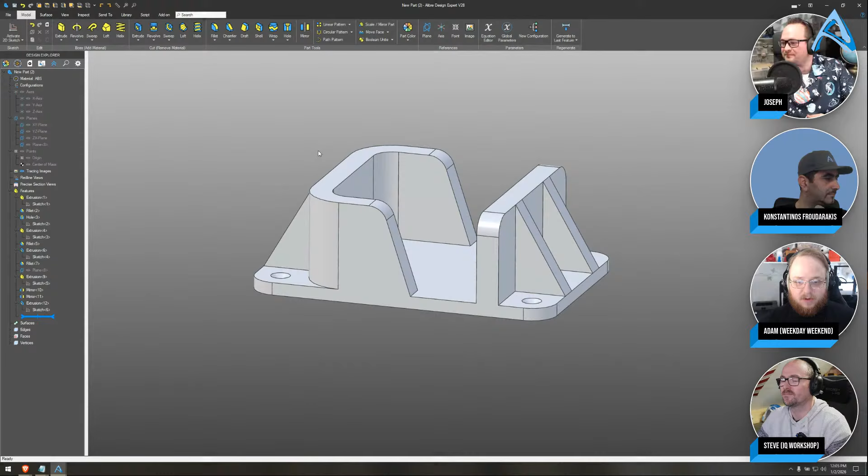I'm already in a part here. This is Adam's screen. Project to sketch is basically just a quick way to get things from another sketch or other geometry into your current sketch. So if I go into a sketch here and then just select a plane, it doesn't really matter.

If I wanted to use this exact curve right here, I could use my shortcut for that, or it's up here in the top left. You can click your edges or even a face that you're going to use in your current sketch, and then tell Alibre how you actually intend to use it. You could use it as a sketch figure and have it all constrained for you with this maintain association, or if you're just going to reference it with maybe some dimensions or something like that.

Sounds like we were echoing back a little bit. We had a little echo from you, Kostas. I muted you, sorry to do that, but...

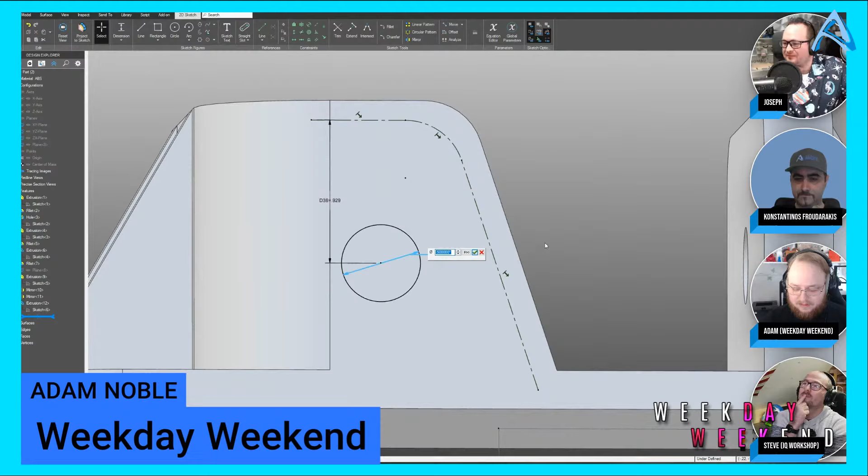Anyway, if you wanted to make a circle here and dimension it from the top, or whatever you might be using, or maybe make it concentric, that makes it a little bit easier sometimes, a little quicker to do that. Actually, it helps if I get rid of this dimension, that'll be what's causing my issue. But if you wanted to make it a little easier to dimension to existing parts of your geometry, that's what it does.

So just as a follow-up question on that, obviously Alibre is parametric and you can go backwards and forwards in your timeline. Is there a way you can ensure that your projected sketches follow any changes you do before that point in your timeline?

That is a good question. That one might be another one for... I haven't had a whole lot of trouble with that, but that might be a better question for Joseph or Kostas there. Yes, I haven't had a whole lot of trouble with that. Ask me one more time, Steve. Sorry, I was working on our sound here.

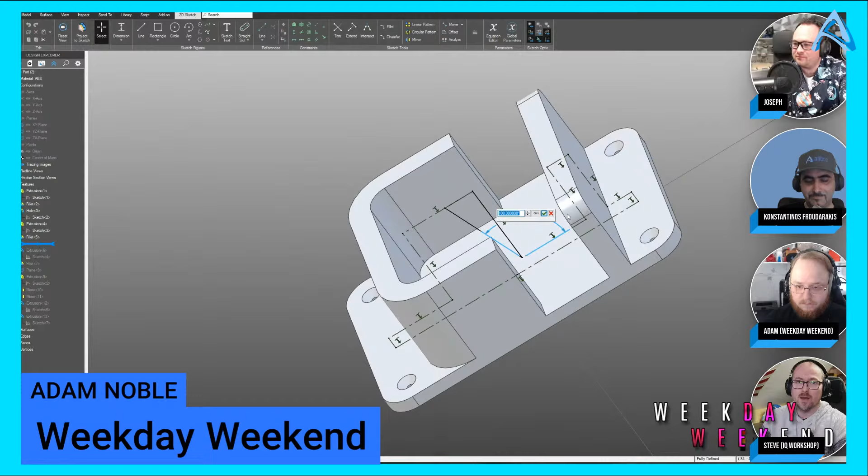So when we project into sketch, you can choose whether it's going to create sketch geometry or reference geometry. Because Alibre is parametric and you have a timeline, is there a way you can ensure that if you make a change before the projection, let's say you change some dimensions, that projected sketch follows the changes you make within your timeline? How can you make sure it's all constrained and you don't lose the logic of what you're trying to do?

Great question. That would come down to checking the box of maintain association, and then with association maintained, it follows the geometry. So you can see here, I'm changing this angle of this drafted surface, and it is following it because I did that maintain association. It is indeed keeping that concentric with this arc here.

Cool, that is a great example to come up with on the fly, Adam, that's very impressive. And a lot of that will automatically dimension. If I try to dimension that and I do a concentric with that arc, it'll usually automatically grab it. But there's certain things maybe you want to make coincident with a point or a line that is already in your geometry.

Maybe something that's on the other side that you can't necessarily see, or maybe it's not a symmetric part. This part's completely symmetric on one side to the other, but maybe it's not, and there's something on the other side you can't see. That's where it shines a little better, because if you can see it, usually you can just dimension to it without issue. But if it's hidden, that might help you a little bit better.

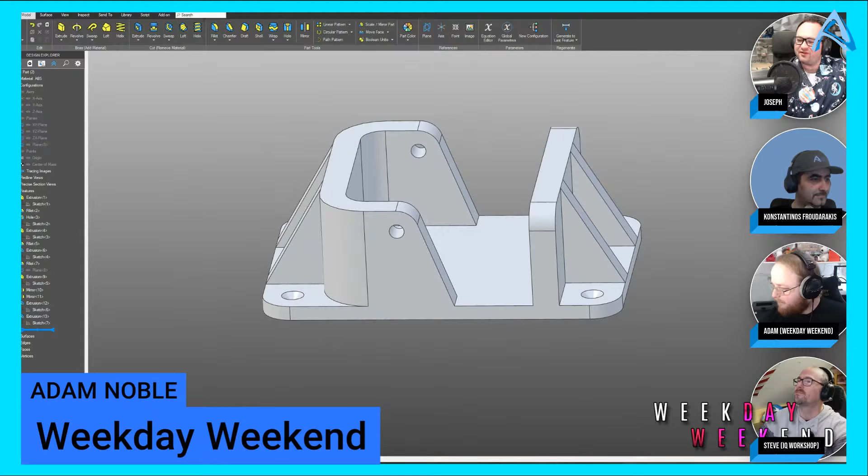I see another one. Can you explain the motion hierarchy of motion in assemblies? I can take that one, unless someone else has anything. No, take the wheel. All right, I'm going to go for it.

Let me get my screen showing here, and I've actually got a model that I can pull up. I'm going to pull that up. There we go. Okay, sharing my screen.

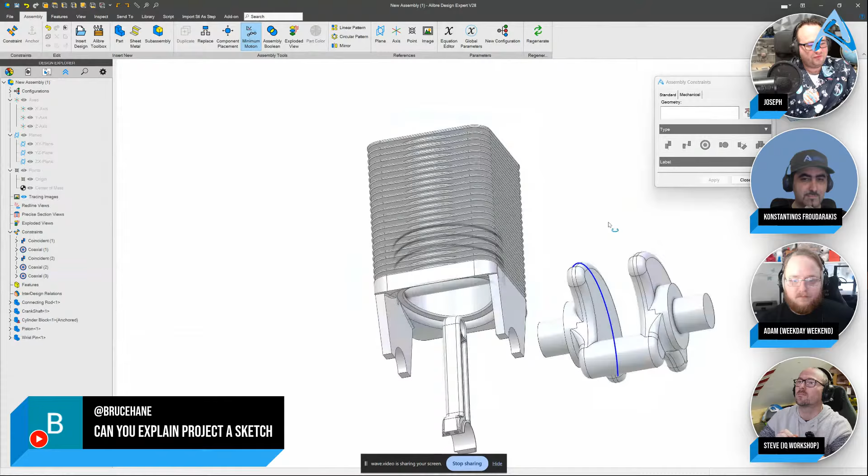And loading my new assembly. So I have here this unassembled small engine, and this is great because, how do we prioritize motion in assemblies? We use a system of constraints to where we say, I have the outer face of my piston, and I want it to go into this round face of my cylinder block, and we have a concentric relationship right there. Once I apply this constraint, I can move the piston in every way except breaking that concentric relationship between the piston and the cylinder block. I can do the same thing, making it concentric with this rod. So again, we allow for all kinds of rotations and twisting, everything except what breaks what we already have applied.

So if we put it into a hierarchy system, I would say whatever you apply first is what gets enforced as its top priority, and then everything else is allowed to move until you constrain it. That's how we get to something that moves just the way that we want. So hopefully that makes sense: what you apply first is what is completely enforced, and you keep adding new relationships until you're only able to move in the way that you want to. Let me know in the comments if that answers your question, and hopefully it does.

Can you provide some tips on using constraints and ways to stay away from the over-constrained error message?

Great question. Is that probably for sketches, I'm thinking? Yeah, usually that comes up during sketching. I can take that, but I don't want to hog the spotlight. Anybody else have a preference?

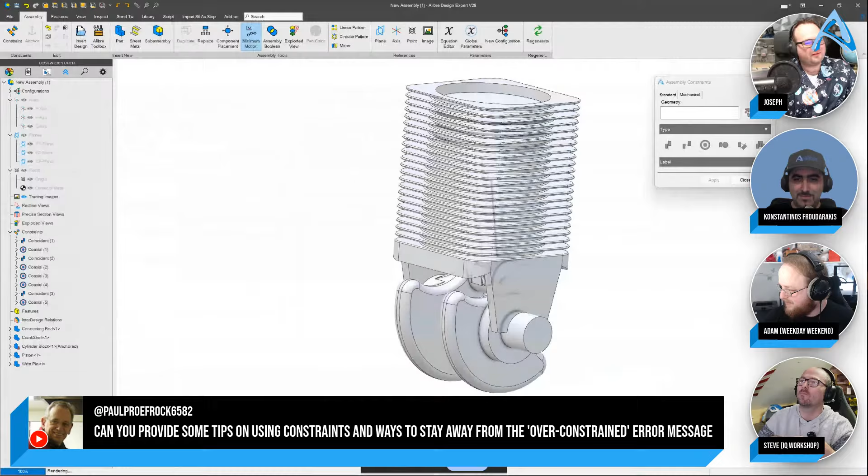All you, Joseph. I'll go ahead and jump into a sketch here. And again, if you're asking about assemblies, let me know. But here in an active sketch, I can start laying down some sketch figures, maybe with arcs, that would probably be the best example, because arcs can be pretty tricky to constrain. In fact, I'll make this arc. So let's say I have an arc and I want to start constraining this sketch.

My number one tip when you're asking about what's constrained and avoiding over-constraints is click and drag. When we click and drag, we can see how the sketch is allowed to move, and that gives us really strong hints on what we want to constrain. So I know that I can change the angle of this line, and I might say I want it to be vertical. If we constrain that one step at a time, we can see that now the line is going to stay vertical no matter how I manipulate it. I can move the end of this line, maybe I want that horizontal with the origin. We just add constraints one at a time, and nothing stops us from seeing how the sketch is allowed to move. I can say I want this arc to be tangent to this line, and then click and drag.

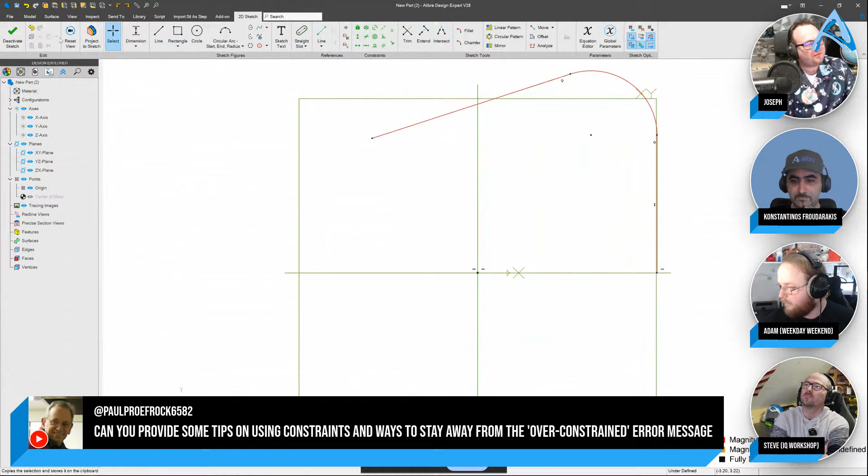That's what I might say, because if we start constraining something in a way that we can see it moving in, we know that we're not adding any redundant constraints. I might give this an angle of 25, and I can see that my arc can change radius. So adding these kinds of constraints to a sketch really is an art form.

With some practice, you can look at a sketch and have a really good instinct about it. If you're just starting out, there's nothing wrong with saying, let me just click and drag. Now I can see I have only 1 degree of freedom left, and it's the length of this line. Maybe I want it to be horizontal with the origin. So we know the kind of sketch we want to have, and we can just take small steps to achieve that. Hopefully that's an adequate explanation. I don't know if anybody here has anything to add.

He looks like he's saying that he's having it shown in assemblies as well. Ah, okay, perfect. Yeah, and right quick, sorry, didn't mean to interrupt there, Bruce.

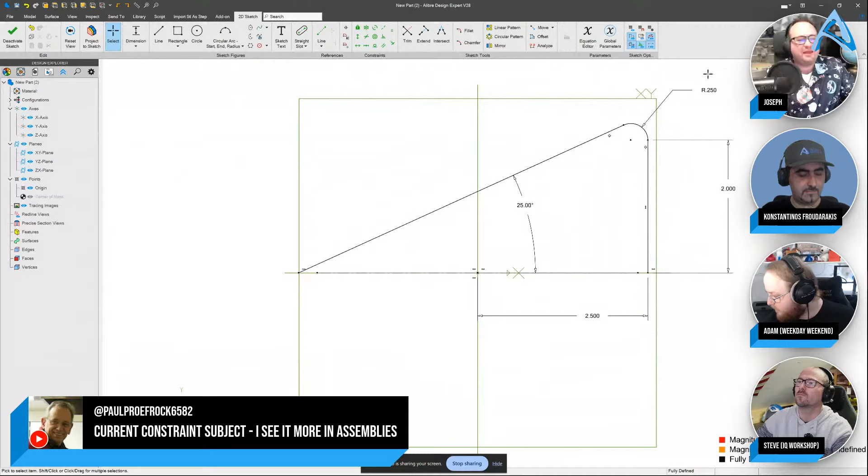There is a lock that you can do. You can lock sketch figures and things without necessarily dimensioning. Of course, you would usually want to dimension everything as much as you can to get it fully defined. Yeah, exactly. Thanks, Kostas. Sorry, didn't mean to interrupt you there.

Awesome, no, I'm so glad. Please interrupt me all the time because you guys always have great things to say.

The nice thing is what I just explained about sketches really applies to assemblies as well. If you think about sketches as taking all these degrees of freedom of how the sketch can move and we're constraining them, same thing with assemblies. We're just dealing with moving parts, and often feel free to utilize this click and drag technique.

Once I add a few constraints, I can see I can twist here, and I don't want to twist here. One great way to prevent twisting is I can select a flat face, or I could even say show reference geometry. These orange planes are the planes I used to model the part with from the part environment. I can select a plane and make a constraint. If I don't want that piston to twist, I can apply that, but that makes it so the rod can't swing.

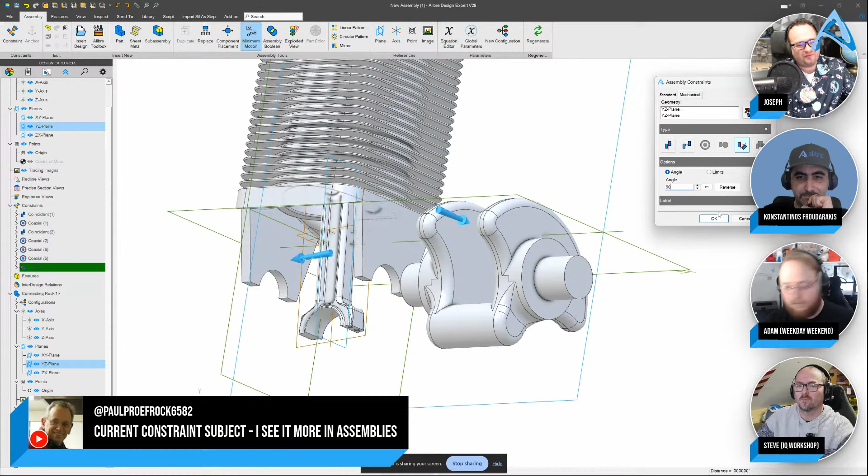So if we end up in a situation like that, we can look at our part in the Explorer. We can go to our constraints, and I can edit that coincident, and maybe make it an angle. Actually 90 degrees is what I wanted. Now, because we did an angle, our rod should be able to swing, and I'm not seeing it swing. So, of course that happens. Let's suppress that. Sometimes you need to uncheck minimum motion for things to work when you have multiple constraints.

But again, constraints are a highly mathematical thing, guys. There's a lot of work in the background from Alibre to try and understand what you're after.

For example, we're used to putting something in place using 3 coincident plane constraints. But in Alibre, things have 6 degrees of freedom, so X, Y, Z, and 3 rotations. Using 3 planes to constrain stuff gives you 9 degrees of freedom locked down. So Alibre needs to figure out which are the 3 redundant, and give you what you want. And that doesn't always work.

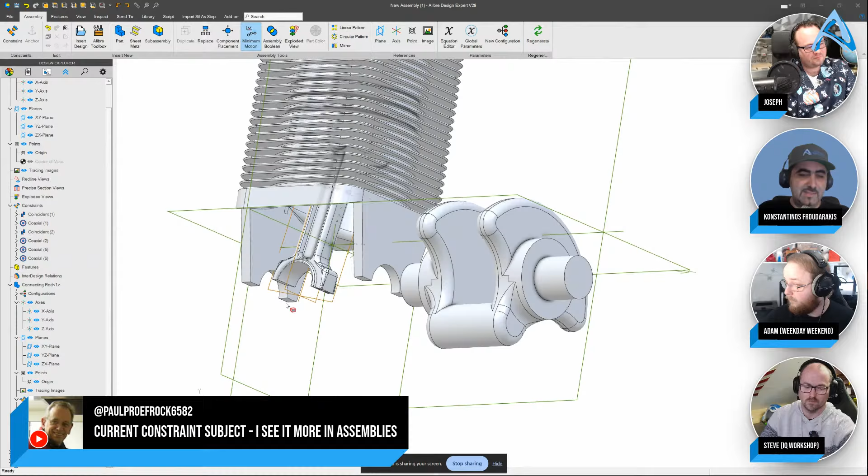It's an issue in other CAD software as well, and it's an issue in Alibre too. What I can say about it is, what I try to do is break things down into sub-assemblies. If you break things down into sub-assemblies, you can still get the motion by making that sub-assembly flexible. This gives the engine a clear indication of what you want, and it usually works better. But it is an art, as Joseph said. It's something you need to get used to.

A few other tips and tricks, like what you said. For example, if I may interrupt you there again - that very problem you had there, Joseph, in a similar video I did, I constrained the plane on the piston, not the rod, and that might make it work. But it's such minute changes. And Joseph on the official Alibre channel has a very good video on creating assemblies with such constraints.

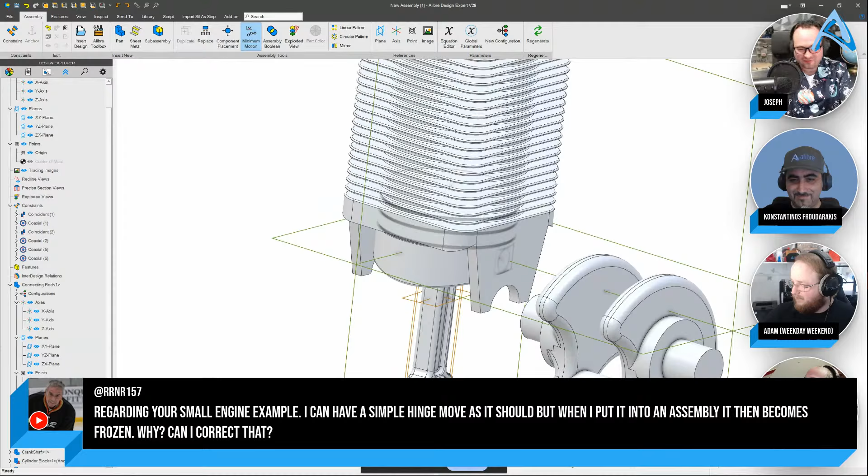So, thank you. If you do come across errors, everything that Kostas said is, of course, fantastically on point. Also, when we look at what could be causing the error, this is not an Alibre issue - every modeler has really intense algorithms that figure out these mates.

And one big issue, which applies to all modelers, is if I put a constraint and make that concentric, we've eliminated the ability of the piston to rotate around the top axis, and we've eliminated a few degrees of freedom. Now if I apply another mate, like putting this right up against that face, this mate also eliminates that same piston's ability to rotate around the top axis. Using mates that eliminate redundant degrees of freedom can be the cause of most errors you see in an assembly.

So focus on, instead of mating all these big faces, you can maybe put a point on there and make that one point level up with the plane. Any modeler using Alibre or any other modeler, that helps fix those issues. It's kind of a universal algorithmic problem.

There's probably not a perfect constraint solving engine out there. So hopefully all that helps. Again, it really starts with you clicking and dragging to see what your degrees of freedom are, and then eliminating those one by one. Let me know if that helps in the chat.

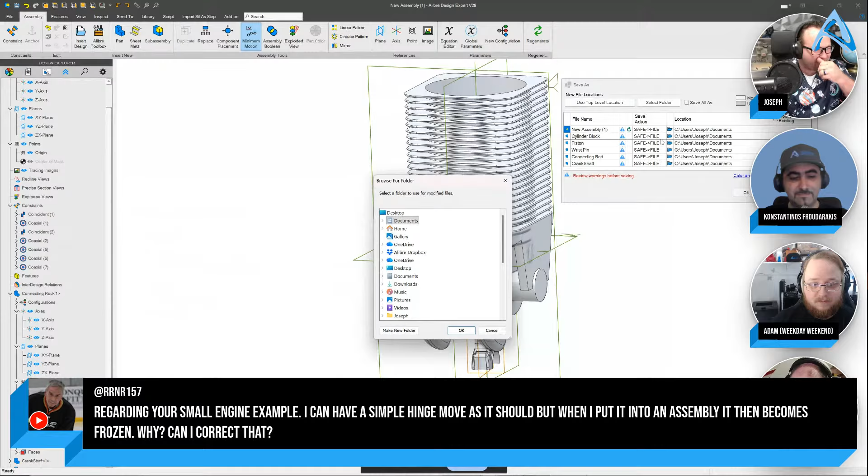We're going to make a little temporary assembly here, and let's start a new one. Oh, I just opened a part. Okay, so we're going to say new assembly, and let's import the assembly we've been working on. It will come in frozen.

Okay, perfect—again, can't move anything. You might ask yourself what's going on. So we're going to right click right here and say make flexible. By default, all your subassemblies come in frozen, so that things don't fly everywhere unpredictably when you move something. So we manually make that flexible, and it looks like that's still anchored. Now I can move all the parts in my subassembly. Hopefully that's a pretty simple fix you can see in real time.

Anyone else have anything to add? Nope, not at the moment. All right.

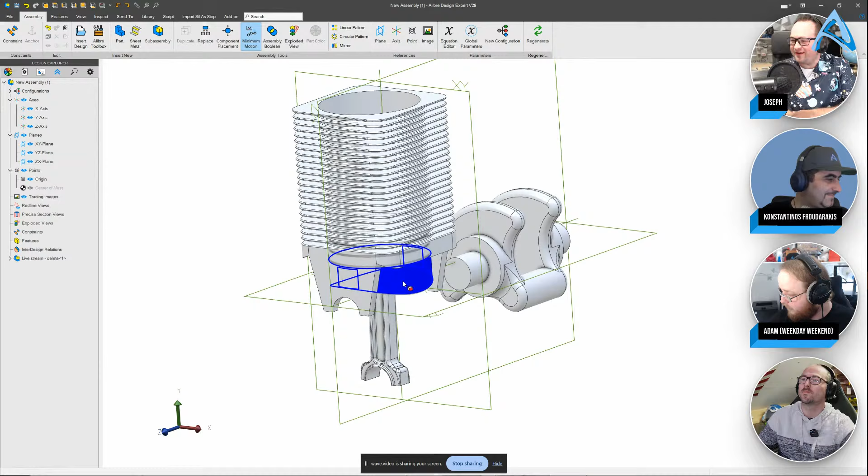I have an error that says entity is deleted when I try to extrude, but the sketch looks complete. I can modify it, but it won't extrude without the error. Yeah, well...

Sometimes I've come across this, and Dave, I don't know if that's exactly what you're trying to do. If you're coming from a different CAD software like SolidWorks or Fusion, you might be used to making sketches that have more than one closed area or section, and Alibre cannot extrude when you have more than one closed section. So that's one way to fix that.

The other potential problem you might have is something we discussed in the previous live chat, especially when importing sketches copied from something else, or importing a DWG or an SVG—sometimes you get duplicate lines. In these cases, you want to use the Analyze Sketch tool, which is a massive help. If you want, guys, I can do a quick demo.

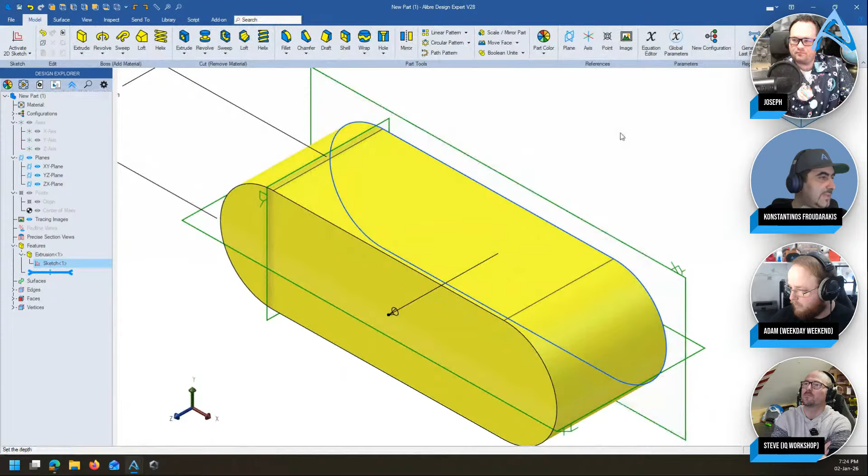So this is pretty much the example we did last time—just a simple slot. If I try and extrude this, it's going to let me extrude, and it's letting me drag and do all that. However, if I have an overlapping line here, it's the exact same thing visually, but if I go and extrude it, it's not going to let me. As you can see, I've got a red button there, and if I click OK, the extrusion comes in with an error.

Sometimes the errors are very helpful, and it says here that the sketch cannot be used because an endpoint is wrongly shared by multiple primitives. Endpoint wrongly shared by multiple primitives—you should look for overlapping lines.

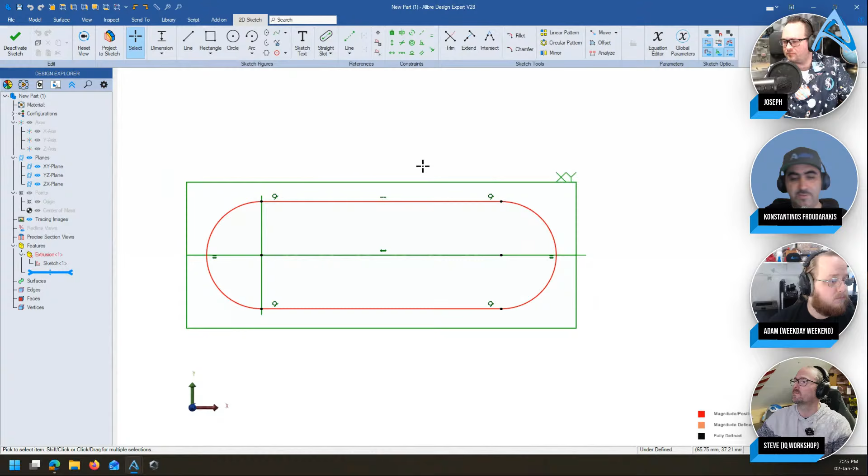And sure enough, if we go back in and use the Analyze tool over here, let me bring it over and click OK—you get open loop, it shows you where the open loop is, an intersection, that's all these, and an overlap. All of these errors are caused by the same thing, which if I go in and delete, yeah, we should be fine.

Right, and now I can extrude again, right? There you go. So yeah, just to show you what I mean by multiple sections - I don't mean this, Alibre is going to know to make a hole there. What we mean by multiple sections is something like this, right? These are multiple sections.

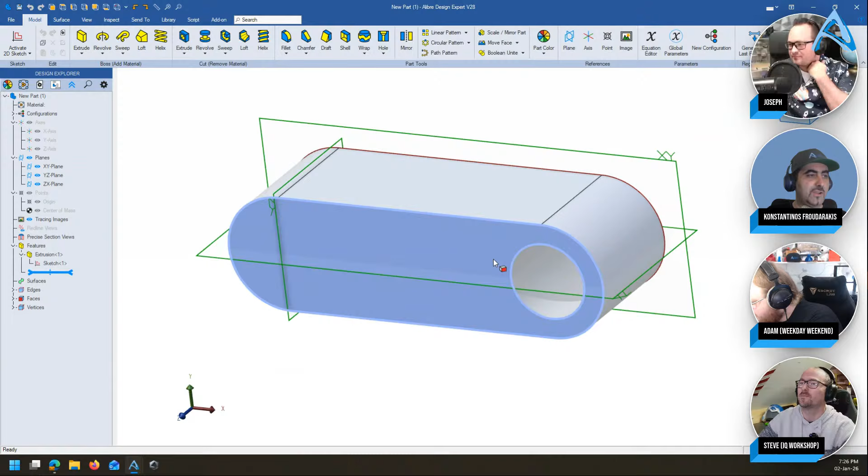So yeah, Alibre is not going to know what to do with that. If you're a SolidWorks user, you might call it multiple contours. It's a bit different - contours, sections, I think Fusion calls them that. But still, I hope that answers your question. If it doesn't, let us know again and we'll discuss it further, because this is a great issue, right? This is something that comes up very often, and it's definitely worth discussing.

Another quick addition to that - this is Max. If you're seeing an error that says something like 'attempting to access record marked as deleted,' it's just a general error. Oftentimes you're in a weird state - and by that explicitly I mean that some chain of events has occurred where your part may be in a state such that you might want to back up to your previous save, depending on the nature of what that error message sounds like.

Sometimes it'll keep going and you'll be fine. Sometimes the weird state can compound on itself. So especially if you can find ways to reproduce that consistently, that would be an example of something that you should send to us so that we can look at further. So it really just depends on the wording of that error - sometimes it's something you can fix, sometimes it's not, and maybe you should just delete the sketch and start over.

Thank you so much, Max. That's really helpful. Yep, we have a help desk that's really helpful, and they're good at tracking that kind of issue. So hopefully that answers your question.

I have a question about the offset command. When I am editing a sketch, how do I get back to the offset dialog again if I want to go back and change the offset dimension value? That's a good one. That's a really good one.

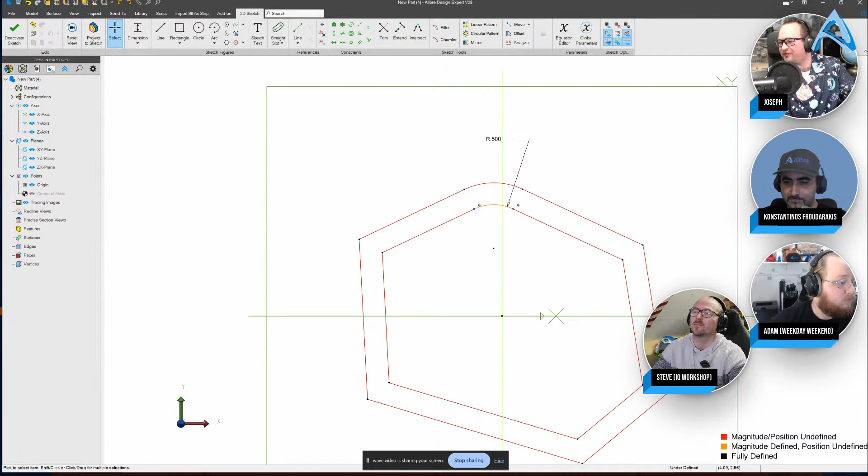I saw a very interesting question. Oh, here's another one. Well, one did come up, but I saw a very interesting question about Kostas being gracious in helping someone. If I can find that one. Yeah, wow, yeah, our producer is on point. That was amazing. Yeah, Rufus, yeah.

Look, guys, I just want to say, first of all, Rufus is too kind, right? That's one. And another thing I want to say is people come talk to us in the forums, right? One of the best forums ever. You will definitely find somebody to help you. There are a lot of people that are active, right, and share answers.

Yep, can you still hear me, Joseph? I can still hear Kostas as well. Yeah, thanks, I can. Yeah.

So I'm saying, people, first of all, thank you so much to Rufus for being so kind, and people, join the forums. Join the forums. First of all, your question might be the question of somebody else, and by asking the question you might help somebody, which is true for this stream as well. And secondly, you will see that there are many people active in the forums and eager to help, right? It's part of the value of Alibre, if I may say so. The forums are so good.

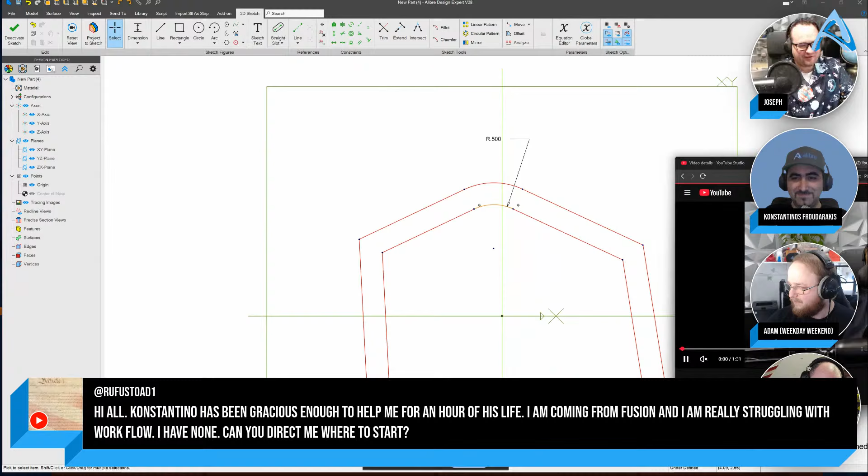All of these videos are about 4 minutes long, covering how to navigate the home screen, what the part environment looks like, all the way down to sheet metal modeling, making 2D drawings, and just about everything else. So this is a great zero to hero guide. If you have trouble navigating, or don't know where to start, the first videos here are very comprehensive as to how to understand everything you're looking at.

And then I think everybody on here has their own different contributions to the CAD community. I don't know if the rest of you want to cover it as well.

Yeah, so for me, it's about making sure you're not trying to use the tools in a way that doesn't work with the way you think, right? That's the first thing. So for example, let me clarify that. Alibre is a solution, right? It's how you apply that to a problem. You don't buy a tool and then go find a problem to fix with it.

So I would say you need to have a very specific project that you want to achieve, and start with that. Try and make it as simple as possible, even if it's very primitive to you, like creating a cube - just creating a sketch, extruding it, and understanding how the inputs you're making to the application actually turn out into the model you're trying to make.

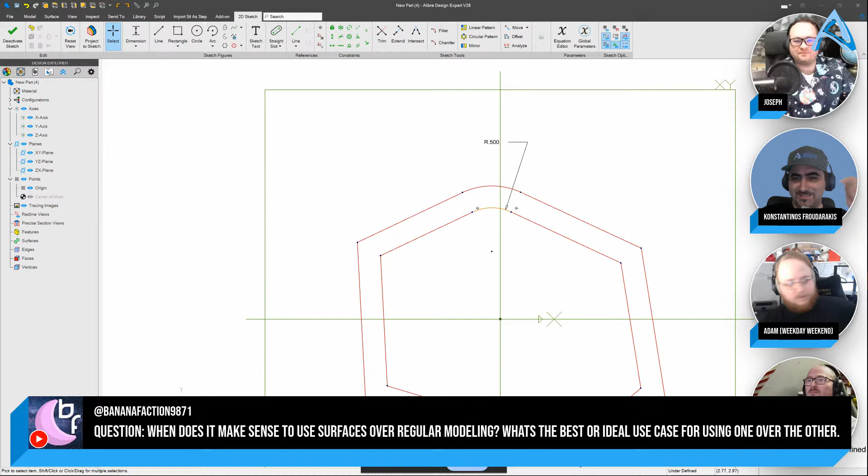Well, actually, can I just say we had a great example in the first live stream where we turned the model into a surface, did a thin extrude, projected that thin extrude to get parametric sketch offsets. So that's a good use of it. But I'm sure Joseph has like 1,000 different uses for it. Yeah, Kostas knows exactly what a fan of surfacing I am.

So I would say if you can model and get the job done using solid geometry, do that. It is going to be a lot more simple, a lot more straightforward. And if someone else wants to go through the model, it'll be simpler for them. And it's probably less computation depending on what you're doing. So prioritize solid geometry. But if you have something where solid modeling is not getting it done, surfacing is a great solution. And here's an example of that.

I have a feature and I want to project downward, and let's say that I want to CNC this part, right? So I select this sketch and I project to take some material away. Let's say that I want to go 1/2 inch down.

Well, if we're going to CNC that, those walls have a lot of overhangs, and that's just not going to work well. I went too far down and broke through the bottom there, but that's not good intent. We want our walls to be vertical, right? So what's the solid modeling solution? It would be an extrude cut, but if we need this face to follow the same curvature as this face, it gets hairy with extruding, right?

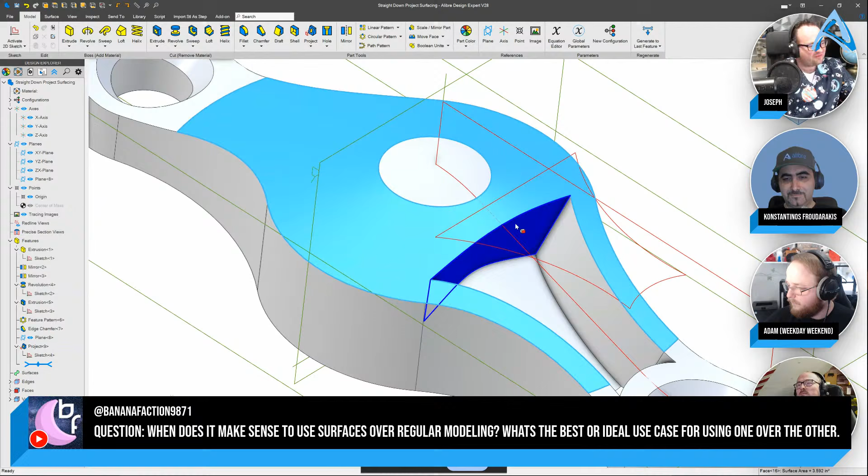There's a few ways we could approach this with surfacing, and surfacing just augments our ability to do things like that. Maybe if I go with the surfacing solution, I'll extrude this to 1 inch, and then make this floating body a surface. I'll grab a surface here and delete this top face. So for my surface workbench, I delete the top face, and now I have these infinitely thin references of the outside of this thing.

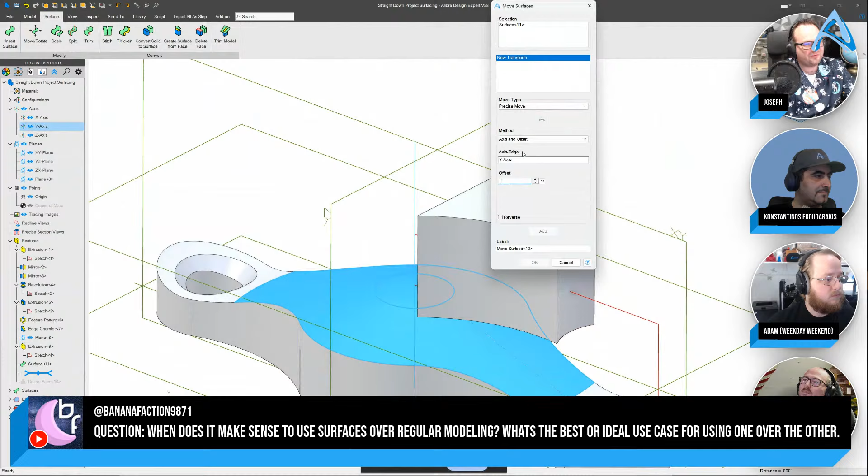But before I do that, let me select these faces here and then create a surface from a face. There we go. And I can move my surfaces upward. You can see that surfacing does break down into a lot of steps, and this is one reason why we may want to default towards solid modeling whenever possible. Let's move that in maybe less than 1 inch, maybe 0.5 upwards. No, 0.75. So we get what we want. There we go.

And then I'm going to modify my sketch. As you can tell, I maybe didn't have this set up for demoing yet. So make that, not that. No. Okay, that should do it.

So we've got the surface, right? And then we can cut out the bottom of this so that the curvature of this face matches. So we're going to say surface, trim model. We select our surface, and then we just trim out the bottom of that, right? Now you can either hide or delete face. There's schools of thought that are great for both. I tend to delete face to get rid of my surfaces when I'm done with using them, but now we can take that back to a surface.

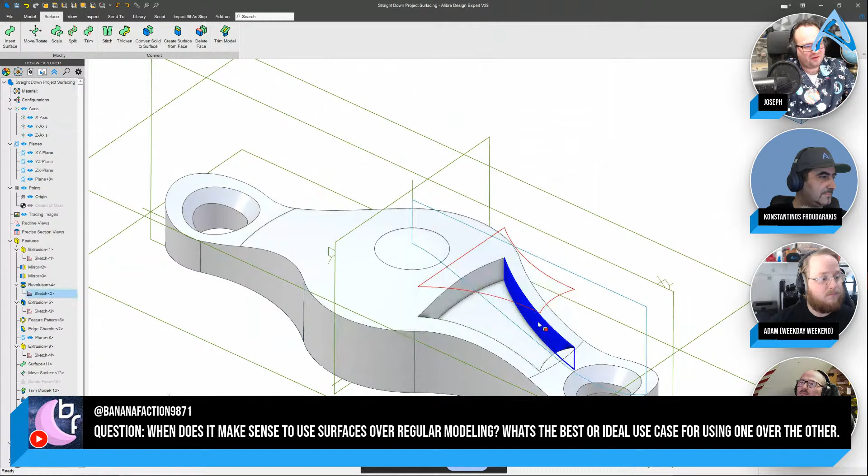Move that downward. We can tell this is just a lot of workflow for surfacing that might be able to be done in one operation with solid modeling. So we'll move that down 1 inch. Once again, trim model. I promise I'm almost done. And then if I go to hide my surface down here, what do you know? We have those vertical walls that are a lot more manufacturing friendly, right?

So surfacing, we can overcome those difficult specific problems by generating surfaces that do what we need. So that's probably the case to use surfaces over regular modeling, but default to regular modeling whenever possible. Let me know if that answers your question, and thank you for asking. Greetings from the Space Coast.

As 3D scanning becomes more and more widespread and affordable, it's helpful to do a webinar or videos that show how to use surfacing. That might be an interesting one, a surfacing webinar. I have brought that up, and maybe that's the push over the edge that I need to start pursuing it. So let's talk about that internally and see what we can do. I think there's a lot of great value in webinars that cover lesser used features.

I'll second that, a webinar on surfacing, because every time Joseph puts up something about surfacing, I learn something. Not just surfacing, direct modeling as well, right? Alibre has some really clever direct modeling features like delete face, offset face, and stuff like that. And when we're talking about importing faces and models, surfacing and these direct modeling commands are a game changer, and they can get you some amazing results. So yeah, definitely worth pursuing, I think.

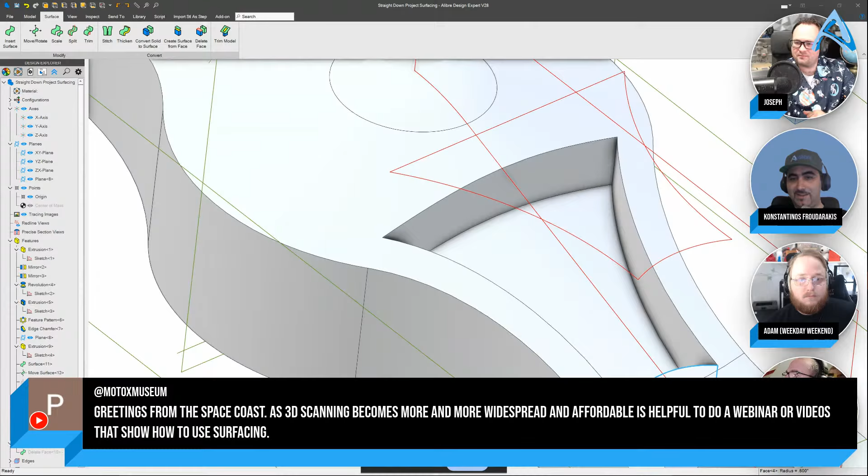Thank you very much. Which setting in the hole tool would you use for the minimum size 3D printed thread? I'm guessing a minimum size is an 8mm diameter bolt. I don't want to hog the limelight.

I do have an answer for that because I was kind of involved with the threading, the thread and hole tool when it updated in V28. I'll take this one. Let me know if anyone has anything to add. I'm not quite sure how on the hole tool. Which setting in the hole tool would you use? Are you just talking about the...

I think I'm running a lot of RAM right now, so I might be running a bit slower. But I'll choose the question that's talking about modeled threads, right? Yes, which Joseph indeed actually worked on most of them.

Then there's another very interesting question by David on how to use a reference line in a sketch as the axis of revolution. As soon as you're done, I might take that on. Oh, awesome, I'd love that.

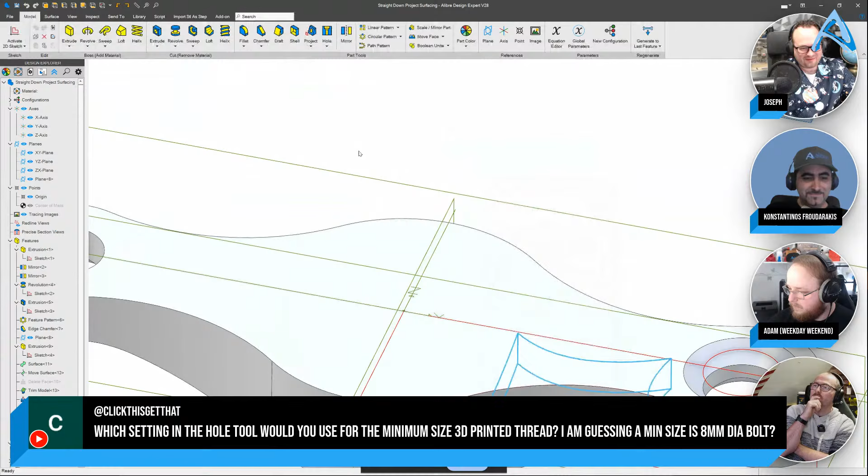I'm just going to open up a new part here, make sure that things are behaving for me. Don't forget to close, that's probably the biggest thing if you're eating RAM. Steve always gives excellent advice.

We're going to extrude that, and now let's jump into the hole tool here. Make sure things are working good. We're going to say unified coarse, and then we'll up the size of that to 0.5, and then we want that to be modeled.

When we go to modeled, there are several options, and I think this is what the question is around. This is the nominal thread, right? When we talk about screw threads, the nominal thread is when the male thread and the female thread have the exact same profile, no gap between them. So it's not a realistic thread.

If you want a production quality thread, and not all platforms do this, so I'm going to pop my collar as Alibre and say that we've got the cool features. We can change this to a production thread by going to, say, average. This is the center of the line tolerance for regular threads.

Now, when we go to minimum material, this is going to be for the loosest fit, because the smallest amount of allowable material for the 1/2 by 13 coarse thread gives the loosest possible fit. Now if you want a really tight fit, this would be the maximum material for the production thread. So if you're not on nominal, there's going to be a gap between your internal and external threads - this is for the tightest fit, and this is for the loosest fit.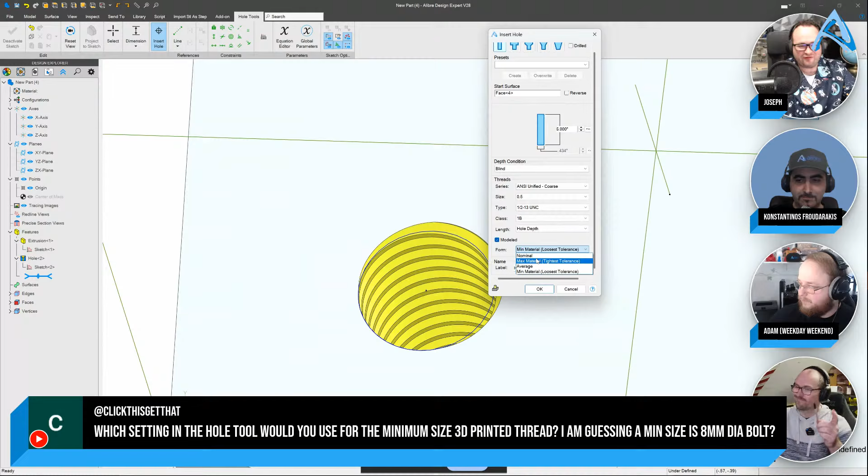Now, if you're 3D printing, 3D printers tend to overbuild a little bit, so you always end up with a little bit of extra material. I'd recommend always 3D printing on the loosest. But if you want to use a tap or a die and fine tune it yourself, maybe you want to go with max material so you have the most material to be able to remove in a very fine fashion. Those are my thoughts on it.

Anybody else have any thoughts on it? It's worth noting that you might want to also double check that your 3D printer is well calibrated and all that kind of good thing. Is my microphone not coming through? No, I can hear you. Making sure. You got to make sure your 3D printer is hearing you pretty well, pretty calibrated and all that kind of stuff.

There we go, cool. Yeah, we might have a sound issue here. Okay, we working now? I can hear everybody. Okay, yeah, I can hear everybody too. It's probably just me. You know what, I think I'm just going to refresh my studio and go ahead, Adam. I think everybody can hear you. Leave us a comment if you can't hear Adam.

Basically, just double check your 3D printer is well calibrated and all that kind of stuff. Threads are quite difficult sometimes. Now, using the minimum material, I was able to get threads my first try, but I've spent a lot of time calibrating my printers. I don't know that my Ender 3 V2 Neo could do it. My P1P certainly can, but my other one might be a little iffy despite all its calibration.

So definitely test out your own printer and learn what it can do, because every printer is going to be different. For me personally, using minimum material worked first try, but if it doesn't, you might want to do some flow rate calibration, which is usually built into things like Orca Slicer. In addition to that, you can look at tolerance tests to print on Printables - there's bound to be some on there that help you figure out what your 3D printer is capable of producing.

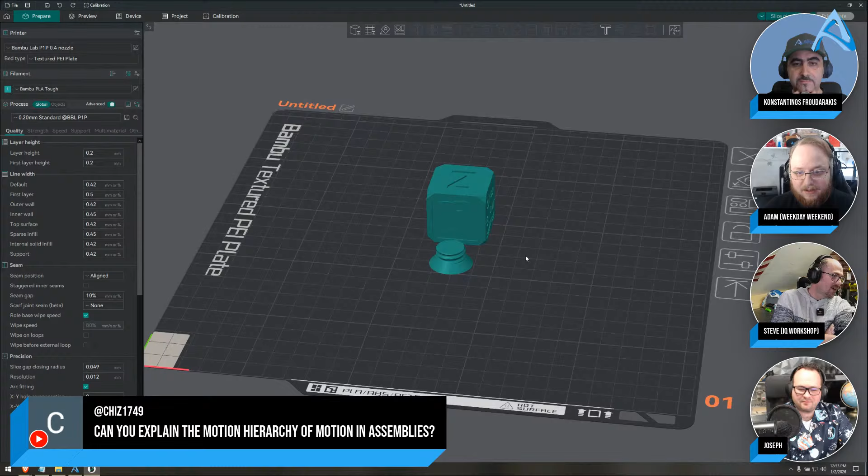So if you're in Orca Slicer, for example, if you just right click on your build plate, you can add handy models, and the Orca tolerance test is a pretty good one that'll tell you how your holes are looking. The Voron cube is also pretty useful. There's a whole bunch of these handy models you can use — the Orca cube has threads in it too.

If you're not using Orca Slicer for 3D printing, you really should be. It's free and open source. Personal opinion, I switched to Orca from Prusa Slicer, and to be fair, it keeps surprising me with the feature sets it's got. I second that recommendation for Orca.

This might be a good one here for you, Joseph. Actually, before we go there, can I just take over the screen, because David had a great question.

Which is how you can use a line in a sketch as an axis of revolution, right? So let's just say that I do something like this. Okay, this is a bit rubbish as modeling, but still. So let's say that I want to revolve this.

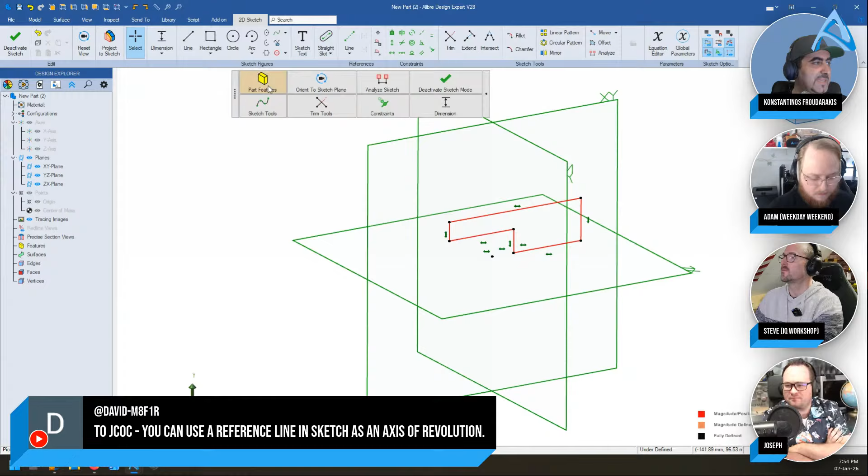First, let me show you something. If you click in a blank space, you can get this very handy toolbar, or you can just hit the space bar and it comes up as well. So you hover over part features and go into revolve boss, and you get your sketch pre-selected here. That fly-off toolbar is really useful.

Now, how to use a line of your sketches as an axis? First, you need to go into your view menu and make sure you have toggled your sketches on, right? The hotkey for that is Control-Shift-K. So you see I'm just toggling it on and off. But when you have it on, you can use your sketch lines as an axis.

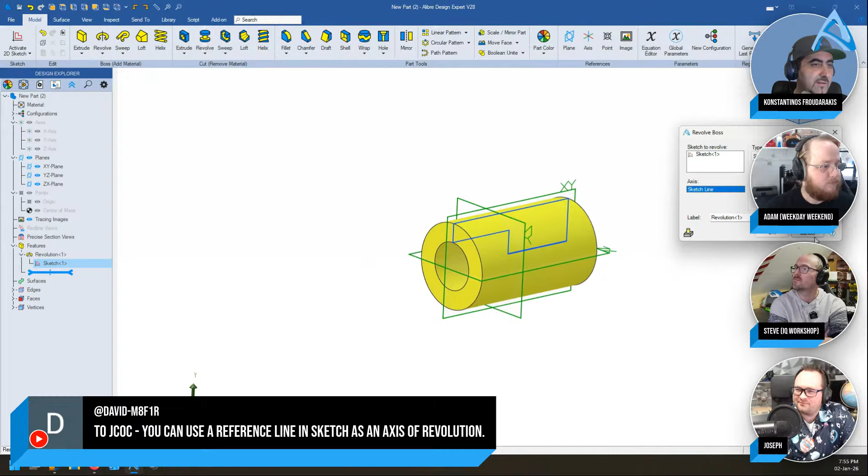For example, as soon as I hover over this line, you saw that it got a different color — let me show that again. As soon as I hover over it, it gets a different color. So I click on it, and now that line is used as the revolve axis, or I could even use this one. So first, make sure you have toggled your sketches on.

And I want to show you yet another way to do it. Whilst you're in Sketch, there is a button in the references area of the toolbar — it says Insert Axis from Sketch. Now, let's say that the axis I want to revolve around is a reference line.

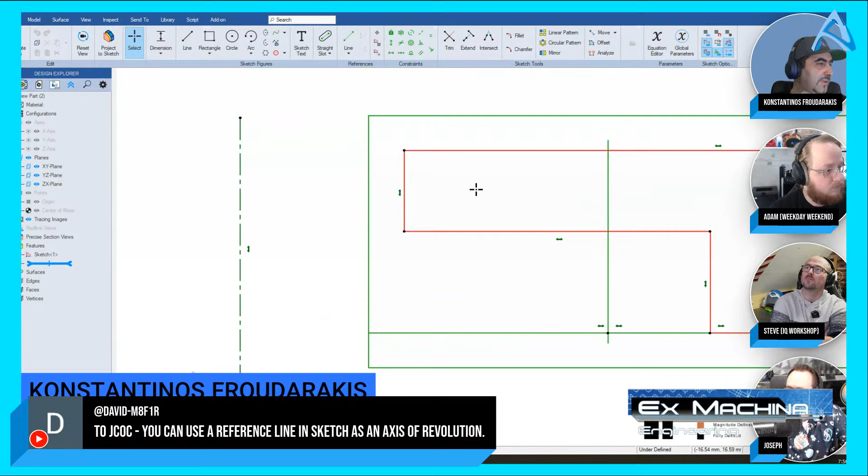Now you see that when I close the sketch, the reference line is no longer visible, but I want to revolve around that reference line. So I hit here where it says Insert Axis from Sketch.

This is the window that comes up. I select this line, hit Apply, close, and now as soon as I come out of my sketch, I have an axis here, which I can use to revolve around.

So I select my sketch, I select my axis, and now this is another way to revolve around basically a line from inside your sketch. Let's say you have a rectangle and you want a hole in each of the corners. One way is to look through my channel and find the pattern fill equation, use that to get one in each corner, or fill the entire thing with holes. But here's another way to do it.

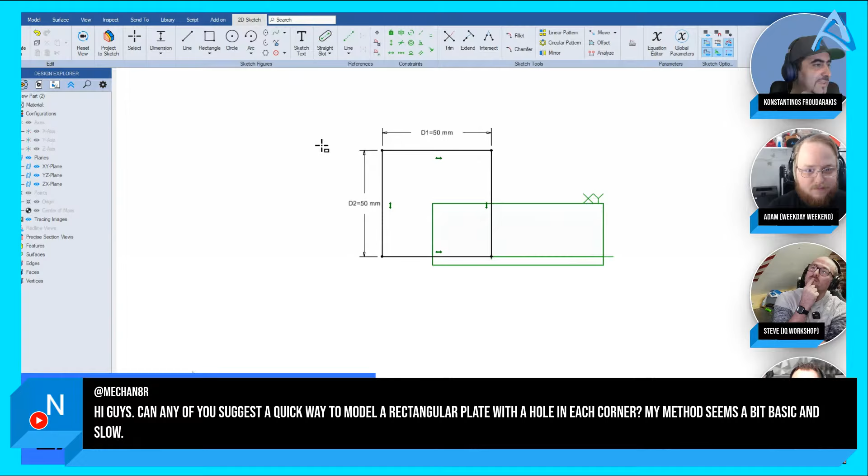Let's say this is 50 by 50, and I'll extrude this for 5 mil. I'll put a hole here, slightly centered, and this hole is also 5. I'll cut through all. So this is a speed modeling quick tip.

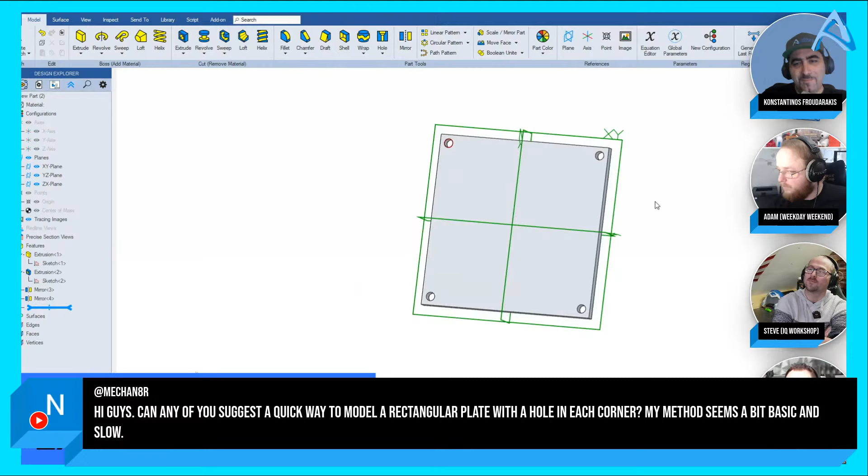Just use mirror. If you use this as the mirror plane and mirror the entire part, now you've got 2 holes. Do that again and mirror the entire part, now you've got 4 holes, one on each corner. So that's a quick way to do it. If your part's conducive to using this, just model a quarter of it and mirror it around.

So yeah, those are two questions that I saw that I wanted answered. If you have anything else, guys, go ahead. Hey, thanks, Costas. Very good stuff. Do you have anything else? Oh, Alex is already on the move here.

I've had instances where, as I add other motions after the initial constraint, the first motion is frozen. Yes, I think I've seen what you're talking about, it's really hard to replicate. I'm guessing it goes back to the assembly constraints we talked about earlier, where multiple redundant constraints may be being taken up. Focus on having every constraint eliminate one or two degrees of freedom at a time, and don't apply constraints that would take multiple redundant degrees of freedom. It's a universal thing, I think all CAD modelers have this problem, it's just algorithms and math.

Can I also add that if a constraint throws an error, Alibre stops showing you and simulating the motion of the assembly. So if for some reason you added a constraint and now the thing doesn't move, go through your constraint list. It's more likely than not that one of the constraints has an X on it and has thrown an error. So check that error message, right click, select status, read that error message, see what's going on, and try to fix it. Just a heads up, if another constraint throws an error, when you add a new one, Alibre will stop showing you the motion of the assembly.

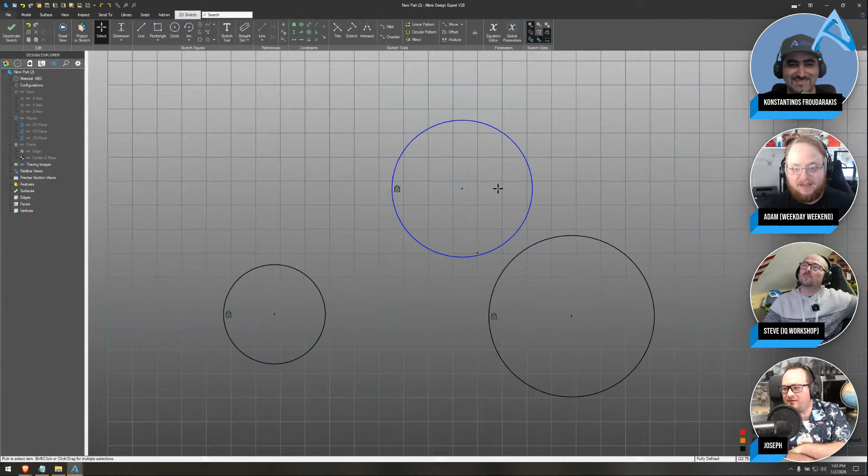You could have a bunch of stuff, and you can just Control A and you should be able to fix your stuff with the fixed constraint like that. If I do it all at once, it tries to fix them all at one time. But just use your fixed constraint, and then it tells Alibre, what you see is what you get, just put it right there and don't worry about it. But if you can, always dimension it.

I'm glad you guys are here because I think I was reading that question wrong. I think that's exactly right. Let us know if that's not what you wanted.

In sketches, I sometimes try to add a dimension and get a message that there's too many constraints, but picking up slightly different points or a different order, it will work.

Sketch solvers - it happens in every platform I've ever used, but I think they're quite rare. I think it comes down to the same principle: can we establish the sketch with fewer constraints, or constraints that eliminate one degree of freedom instead of five, so that the next thing we add limits the amount of redundant constraints when locking up different degrees of freedom.

This is kind of a theme for this stream - I'm really liking it, we'll call this the redundant constraint stream or something like that. The more complicated your sketch gets, the more likely you're going to run into something like that. It's not necessarily the fault of Alibre or any modeler - just the more stuff the algorithm has to calculate, the more likely you are that something's going to catch on something else and you'll run into an issue.

Can I just add another thing? When working with a parametric design software like Alibre, or SolidWorks or Fusion - every time you're working with parametric CAD, not AutoCAD or SketchUp - it pays to have simple sketches. Every little feature of your model should be a different sketch, and a different feature at that.

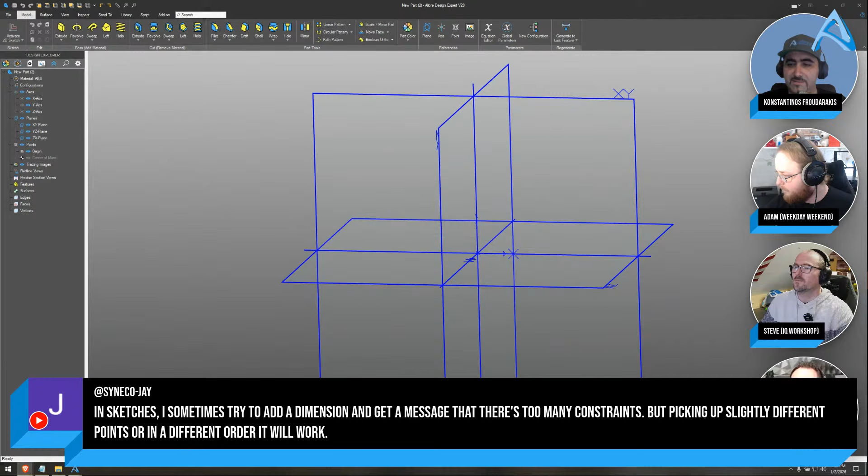That's great advice. I've been guilty of making too complex sketches in my early work, and we're all trying to be more simple. So I'm going to eat my own dog food here - I said earlier that the only stupid question is the one you didn't ask.

You mentioned the sketch analyzer to try and find faults - is that available in Atom 3D? Or where is it? Because I can't see it.

Great question. In Expert and Professional level, in a sketch, we have this nice little analyze feature. I have to lay some sketch down here, but analyze is right there in Expert and Professional. In Atom 3D, you don't have a button that invokes this, but if your sketch has an error - like if I make a line on top of a line and deactivate the sketch - I have my warnings turned off, but a little warning will normally come up if you don't turn it off, and then it gives you the option to analyze the sketch. So it's a little bit more baked into the system than being forward facing, but there you go.

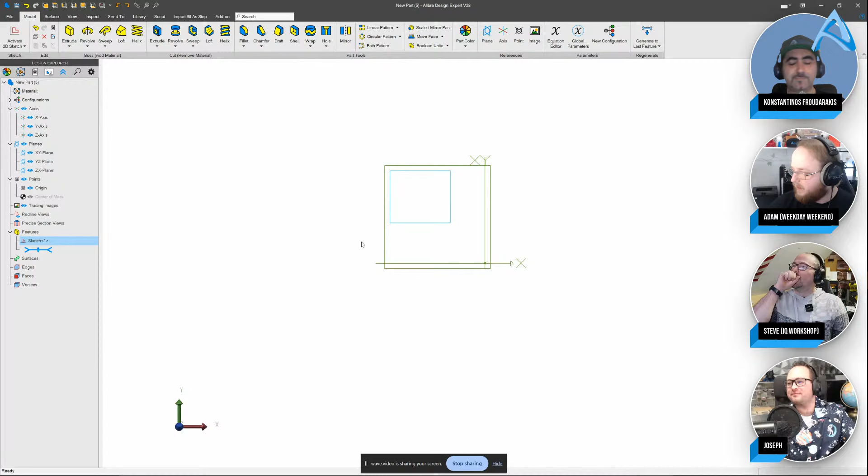Ted Nickel on Facebook, I think he just answered your question as well - overconstrained, that analyze sketch is going to help you out right there. Or you can look at the error that comes up with the sketch - that's going to tell you what caused the error.

Often when doing a sketch, I use the dimension tool, and the last node or line is automatically selected. Is there an option to change that behavior?

That's a good question. I'm not sure there is, but I love that feature. It's helped me in so many speed modeling qualifiers. Where you add a constraint to a line, like an equal or vertical constraint, then you hit D and you're dimensioning that line. For example, if you make two lines equal, the last line you selected is kind of left in memory, and if you hit D, you're straight jumping into dimensioning it. I just love that behavior. I don't know if there's an option to disable that.

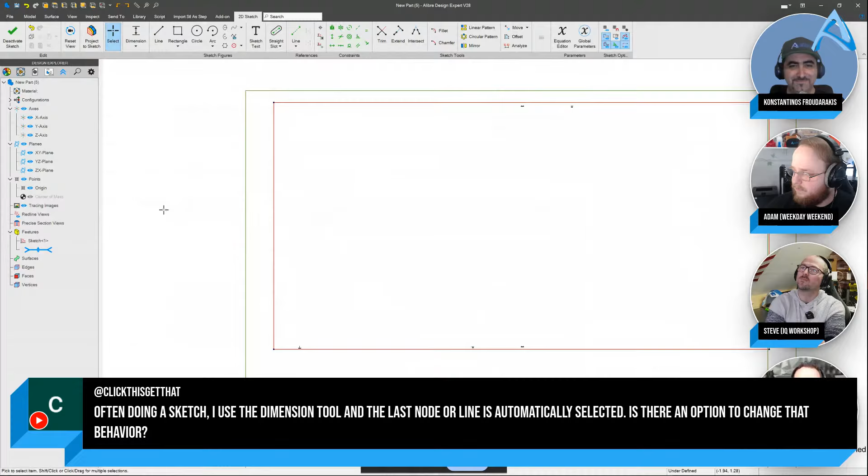Okay, I've got one that's simple. If I make these equal, and then if I just click in the white space and hit D... if you click in white space, it's deselected. Interesting. That could be a good suggested feature. Maybe it's easy to do.

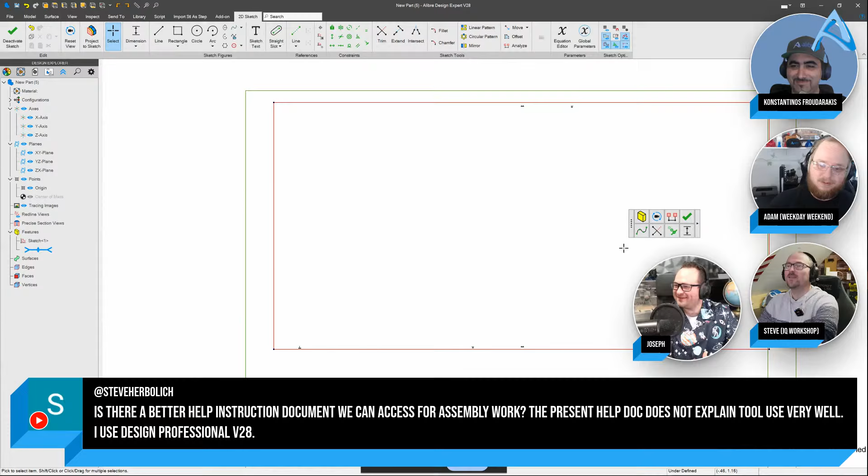Interesting. Well, we have the official documentation at help.alibre.com, if that's what you're referring to. There's also a lot of material on YouTube. We have a long playlist that covers all of the workflows of assemblies as well. There's some YouTube channels out there too, Weekday Weekend, Ex Machina. Ex Machina doesn't have a whole lot on assemblies, but Ex Machina and the official Alibre channel will definitely have you covered there.

Why can't I use a disconnected line that in a sketch is an axis of revolution for the intended feature? It comes down to how we need closed contours to define how we want to revolve. This could be a good one for you, Kostas, since you're pretty sharp on revolves. Yeah, I just did an example of that, but it doesn't hurt to do it again. So if you guys just show my screen...

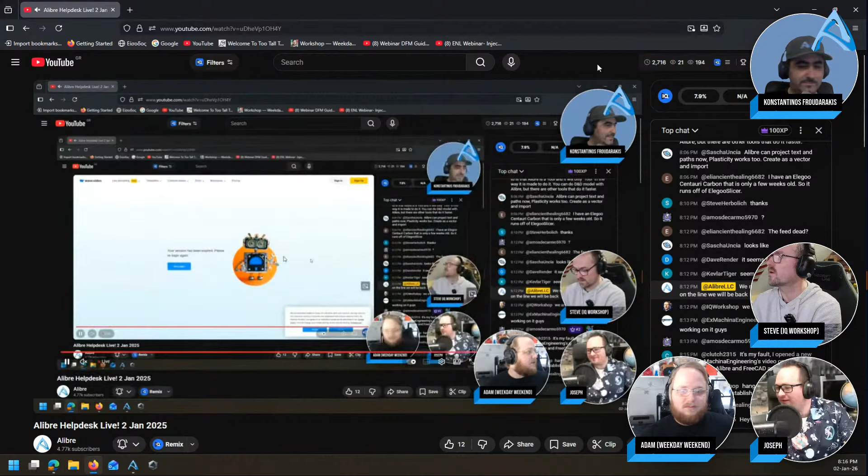Sorry about that, guys. Just to answer the question that was on screen when we crashed, which was about—well, I can't find it now—it was Axis from Sketch, I believe, something, I don't remember the name exactly. We did mention that briefly, but it's a good example to cover further.

So what I did earlier on this stream is I made a reference line here, then went to Insert Axis from Sketch, selected this one, and made an axis out of it. Now I can hit revolve, and as an axis I can select—let me show my axis—I can select this axis I just made, and I get the revolve. Cool, that works. Now there's another thing to be said here, let me hide my axis again.

If I convert that to a regular figure instead, even though I have my sketches showing, here's that line. If I try and revolve it, even if I select this line as a revolve axis, it's not letting me do it. The reason is that line is now a regular figure, so we fall back to that same problem of the two sections not being usable for features. This is a different section, or a different closed loop, for Alibre, so that's why you'd have to close it off.

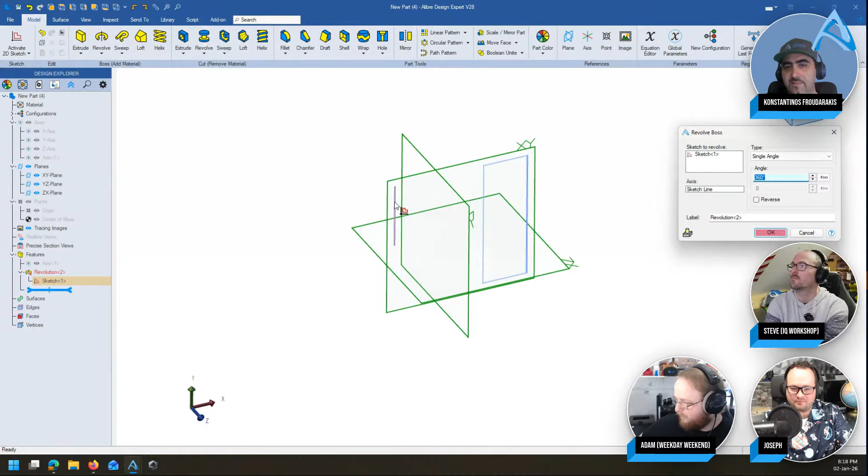Even if I go ahead and select this sketch, even if I select this line, it's still not doing it, because this is a regular figure. So if you want to use it as a revolution axis, convert it to a reference line, then use Insert Axis from Sketch, and you'll get an axis created—then it's just an axis, and you can use it for whatever axes are used. Brilliant, so that's that.

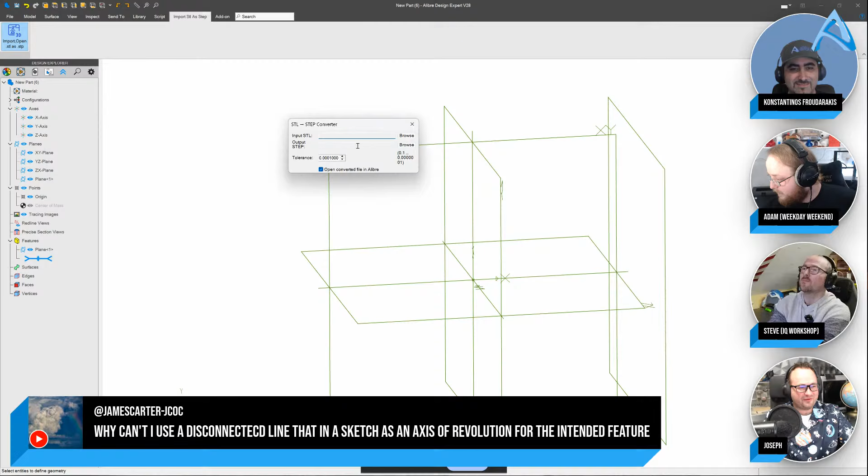So on the Alibre forums, he has this import STL as step add-in that you can have, and I still haven't used it, but you can choose the STL that you want to input. It's great, isn't it? Yeah. Then you can have your output step file, and it imports it into Alibre that way. So there's third-party software. There's also that add-in. The add-in, of course, is not made by Alibre, and so it's third-party, but great user on the forum, if that helps. That's another reason to visit the forums, right? There are some great add-ons there. Right. Made by amazing people.

Ted on Facebook, it might be worth adding a feature request. I know they're looking at a lot of new stuff, and it might be something that they would be willing to consider. I would put that there as a feature request just to see. Yeah, and as well, just to add on to that, if you have any feature requests related to scan data or bringing in mesh data or anything like that, make sure that you also explain what you want to do with it. Because part of the reason we haven't yet done it is because depending on what you want to do with it requires vastly different sets of technology.

Yes. And if you just want to look at it, that's pretty easy. If you want to look at it and then cut it in half and then interrogate a cross section to create a sketch, well, that's a whole other thing. If you want to convert it into a solid and then drill a hole through it, well, that's a whole other thing. So it helps us to hone in on which technology sets are most valuable if we know why. So be sure to include that if you submit that. Yep. That'd be very helpful.

And one quick comment for you, Costas. I like the Alibre hat. Thanks, David. So Davinchewk also makes some great videos on Alibre and Plasticity, I think. But he's made some great content with Alibre as well. Yeah, really nice YouTuber. And thanks for the comment. I didn't make the hat, actually.

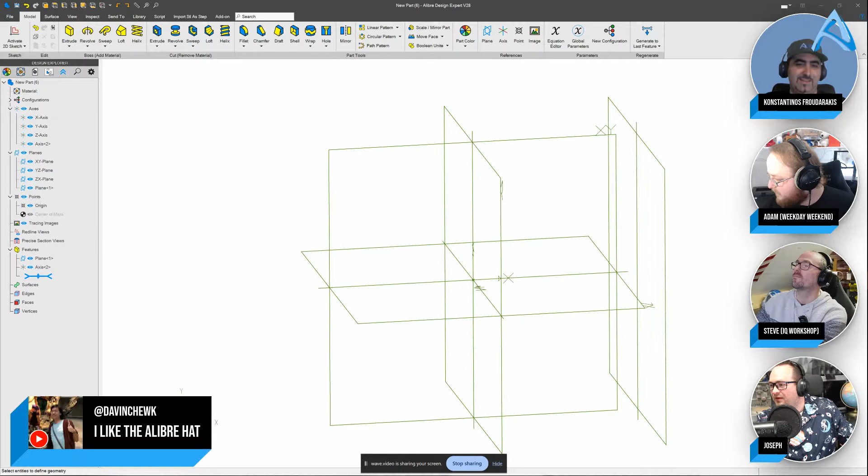Absolutely, and can I jump in with another one? Let me show another comment here: how does Alibre compare with FreeCAD and Fusion 360?

I'll take that one. Alibre does mechanical 3D design, right? That's what it does. It doesn't have tools for CAM or finite element analysis or anything like that. In parametric mechanical design, Alibre does not compare with FreeCAD—it is miles ahead of FreeCAD, nowhere near it. Now, Fusion 360 has got some fancy tools. They don't always work, they work the vast majority of the time but not always, and it's a lot more expensive in the long run.

And we're talking about vanilla Fusion 360. As soon as you add one of their extensions, their newfangled way of throwing down paywalls, Fusion 360 becomes—it's like microtransactions, exactly like microtransactions in video games. So as soon as you throw in a single one of those extensions, Fusion becomes horribly more expensive than Alibre. As I've said very often, Alibre is something like 20% of the price for 95% of the performance. So that's my take on that.

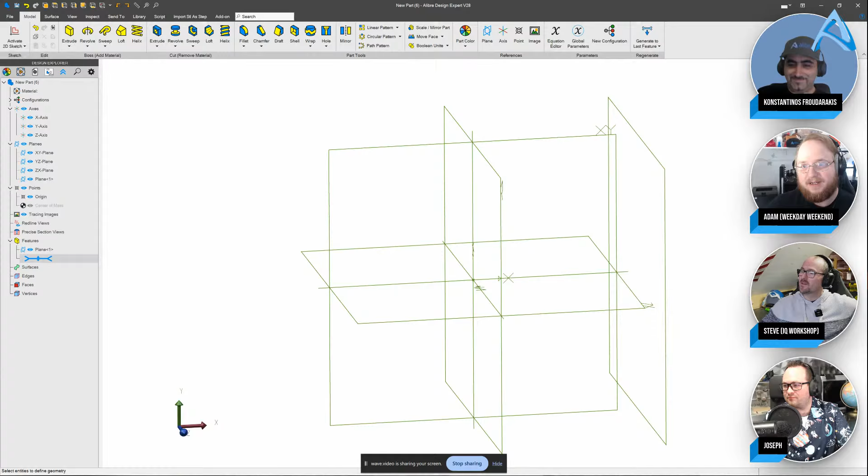Without getting into legalese, I'd also recommend people check the terms of service of their other CAD softwares versus Alibre. In my personal opinion, Alibre's is way better and more consumer friendly. I did a video going through Fusion's TOS and disclosure policy and how much of my data is being shared with who knows. My take on FreeCAD is that, one, I love the fact that it exists—an open source piece of software that has features.

However, comparing it to Alibre, Alibre is like riding a bike, where FreeCAD, with all of its different workbenches, is a little bit like that sketch in Mr. Bean, where he's sat on top of his Mini in an armchair, driving it with a mop and a rope. I find I've got to do mental gymnastics to use FreeCAD, where I can just get on with my work in Alibre.

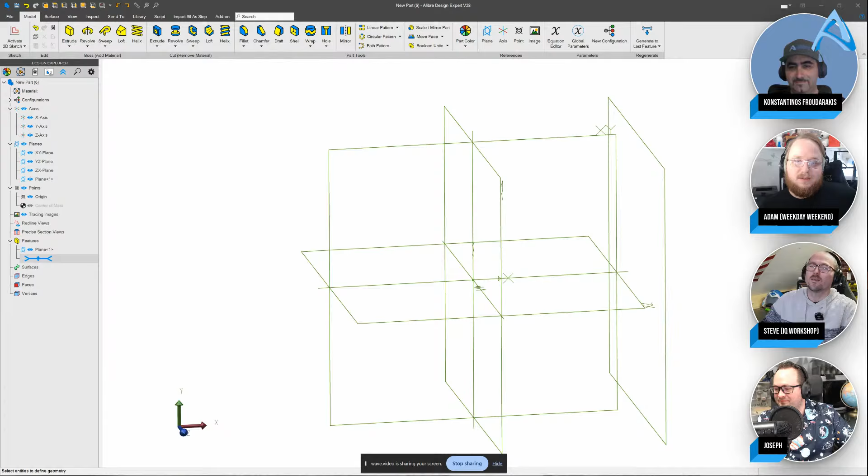I think that's a great analogy. I think Costas had a fantastic comment on one of my earlier videos - it's basically like you can get FreeCAD to work. You can, and if you learn FreeCAD from the beginning, it will work for you, but it's almost like learning the right thing the wrong way. Alibre is industry standard, guys - it does everything the same way every other CAD software does it, or better. With FreeCAD, you're having to go through hoops to do some things. Tools aren't named the same sometimes, or features don't work the same as in other CAD packages, whereas Alibre is much closer to what you would find, or exactly what you would find, or better than what you'd find in other options.

There's another application that's similar in my mind to FreeCAD in terms of the mental gymnastics you've got to go through to get a result, and that's Blender. Blender is an amazing piece of art CAD. It's written by a guy from Amsterdam, Ton Roosendaal. He was one of the co-founders of the Neo Geo gaming console, if you're old enough to remember that - I think I've just dated myself. But it's great for doing things like organics, and I believe the Amazing Spider-Man 2 previs was done in Blender for the movie.

So it's capable, but it's not in the same league as CAD applications designed for making models of physical things you're going to be manufacturing. It's worth noting there's a difference between a 3D modeler and a parametric 3D modeler, or CAD. Blender is almost more like modeling with clay - you don't necessarily need everything to be exactly millimeter precise. Whereas when you're trying to design something to use around the house or as a production part, then CAD is what you'd want to use. But Blender is a fantastic piece of software if you're looking for 3D modeling for that kind of thing.

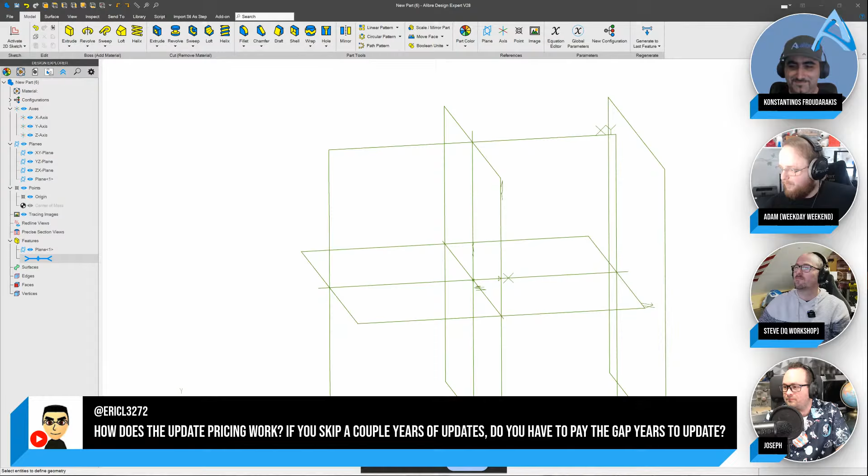I thought this one was interesting - how to rotate a plane a given amount.

We're still looking at my screen. One thing you can do is use a reference plane and create an axis, then make a plane defined by that axis and another plane, with some angle between them, maybe 30 degrees. But I think what the user is really getting at is: if I make a sketch on this plane, and then after a while they say, oh no, I want to rotate this plane, how can I do that? We can just finagle the history tree a little bit and say let's pretend this axis doesn't exist.

I can make a plane and offset it the same amount. Now I don't remember how much that offset was... let's say 2.5... 3. There we go.

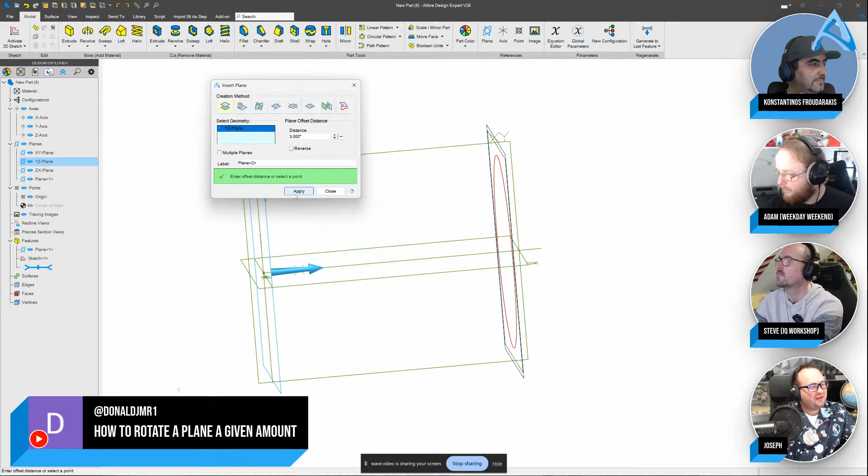So if I have two planes overlapping, I can define my axis on this next plane. Then I can take the plane that has my sketch on it and drag it down the history tree so it's the last thing, and redefine it on the YZ plane and on my axis. Hopefully I get this to work.

So we edit and choose our axis, and then it goes to our angle, 30 degrees, and there we were able to rotate that sketch. So hopefully that helps. We can always change the order of things in our tree so it doesn't have to stay fixed the way it is. Let me know in the comments if that answers your question.

Another one: can you add left-hand thread design in the custom threads sheet? Excellent question. As of right now, that's not supported. Please document that need and use the suggested feature tool, because we'd love to know if a lot of users are looking for left-hand threads being natively supported. They can obviously be manually edited, and you might be able to mirror the part to get that as a workaround.

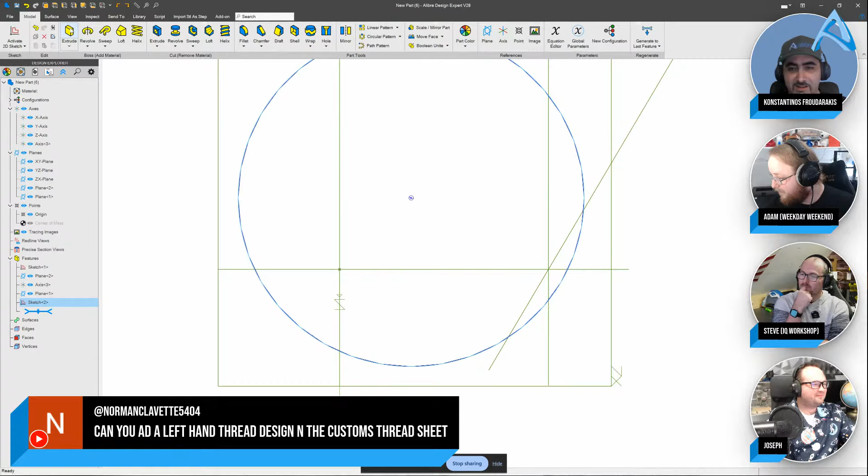You can mirror the part, right? Could you do that with surfaces too, I wonder? Yes, you could. I don't know how much we want to get into that - that might be a great standalone video. But yeah, mirroring the part will give you a left-hand thread, for sure.

Bradley Rickson asks about importing an STL. We covered that just a couple minutes ago. Kostas has some good stuff on that, importing STLs. There are some workarounds needed, but it's possible - you have to go through some other hoops, but you can do it. Kostas has some good videos on that though. Ex Machina Engineering.

I'm going to try to see if I can finagle a left-handed thread. Here's another one that might be interesting for you guys, especially Steve.

Do you do much woodworking? I wouldn't exactly call the work that I do woodworking. I mean, I probably ruin boards, but... I think you're just being too modest. That's what I think.

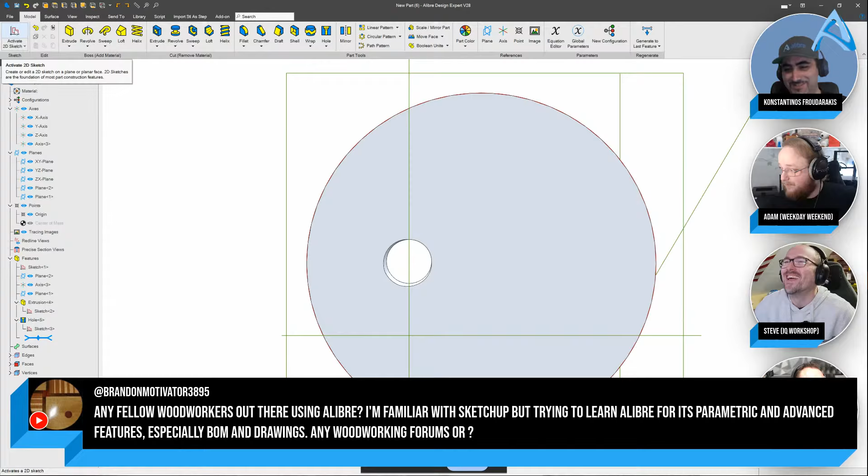This one's looking specifically at if you were to build an assembly, can you get a bill of materials and drawings, so you can have a cut list and all that sort of stuff? That's not something I've done using Alibre natively - it's something I've done manually, but I guess that's not going to be the answer to the question. What can Alibre do in that regard?

Well, can I just say that if you watch my channel, watch this space in the next month or so for a nice little woodworking mini project. But yeah, definitely bill of materials and drawings.

The beauty of Alibre as a parametric modeling software is that you get a bill of material and drawings, and they update when you change your part. So you can have a cabinet, for example, and design it so that when you increase its height, the sides adjust themselves, and you can have 3 or 4 shelves in it. As you make these changes parametrically, the bill of materials is going to reflect that - it will update and show these things, and the drawings will also update with the new dimensions automatically. That's the beauty of parametric modeling over something like SketchUp.

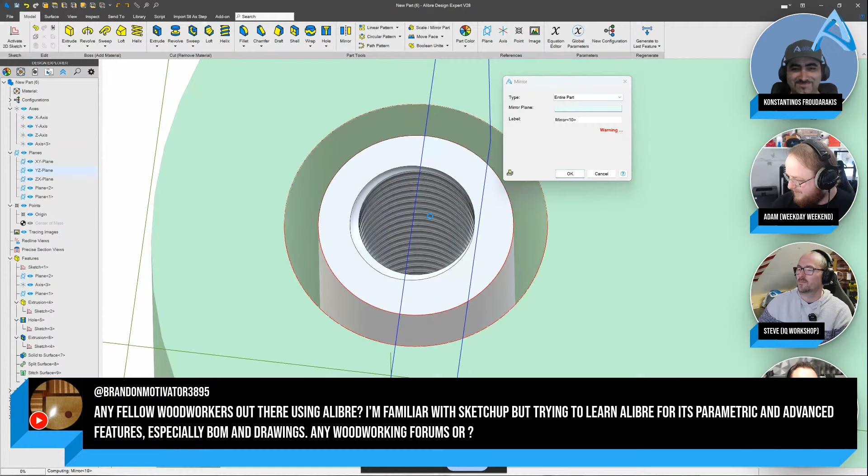So I created a thread, I converted the whole thing. I used a split and split out this thread so it's kind of its own floating body. I converted everything to a surface. I stitched this to a solid, and I'm just trying to mirror only the thread so that any other features on this model will be ignored, and this can be mirrored, then stitched back into a solid. This is pretty heavy, so we'll see what happens, but that would be my approach if we were using surfacing.

I think we have another one here. Do you rename every constraint, or do you use the default name? I've gotten into the habit of using default, and it's very difficult to find the correct constraint.

Excellent question. There's an old saying: not every good modeler renames everything in the tree, but there are no bad modelers that rename things in the tree. So I think the very fact that you're asking that question points to the fact that you're a good modeler. Actually, I had a professor in university, the guy who taught me CAD, and in exams he would take off marks if you hadn't renamed everything, every single sketch, every single feature. That was annoying doing an exam in university, but in a large model, it can be a lifesaver.

Especially now in V28, Alibre has a search function for the model tree. And that, renaming things just becomes a superpower. I don't always do it, I'll have to admit that. Most of the time I don't. If it's something important, I rename it. But yeah, renaming everything is actually a good practice.

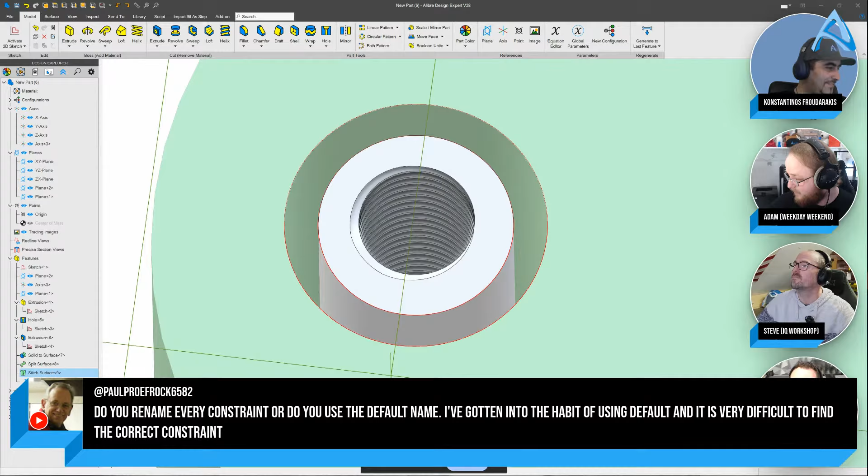What is the best way to create a reference mid-plane between two features? Oh yes, that might be a good one. Let's go to your screen, Kostas. Sorry to shove one at you, but that's what I'm interested in. Do not be sorry to do it.

Okay, so there are many different ways to do it. Let me just get a quick model going. So I'll do 100 by 50, let's fully constrain it, let's do 10. And then I'll start another sketch, imprint everything, get a rectangle going from here to here for 20, and let's do that for 50 millimeters, and then let's mirror this. I promise you guys, there's a reason I'm doing this.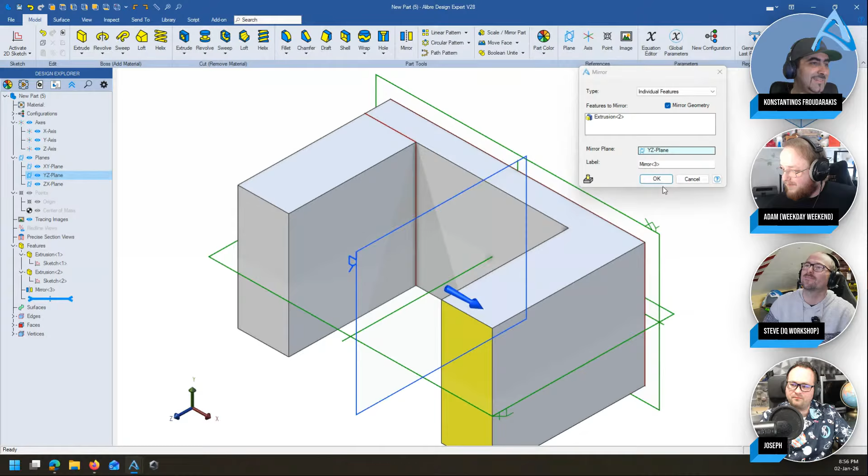Okay, so let's say we've got this part. Oh, that wasn't very clever, was it? Yeah, well, it was. Let's see. So a couple of ways to do midplanes, right?

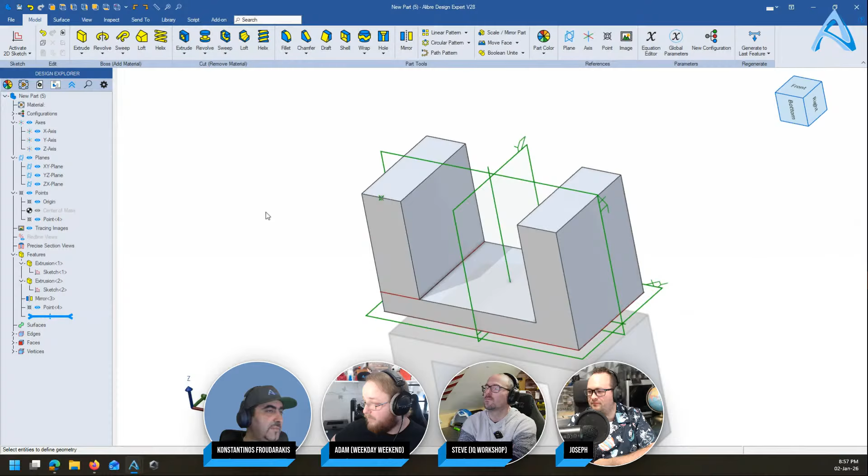Let's say we want to make a midplane along this finger here. I've done one of my very first videos about this. So you start a point and click on that edge. Alibre, when you select something to create a reference, points you to the correct creation method. So when you select the edge, it goes to the along-edge creation method. 0.5, or 50%, is the default value, so smack down in the middle. I hit apply, and now I've got a point. Let me show my points, so now I have a point there. Then I go into the plane command, again I do not select the creation method, I just go and select that point, then select the edge, and it goes into the axis-point creation method. Then I click normal to axis, and now I have a midplane along that feature.

Okay, so there's yet another way. Let's go again into the points. I click on that vertex, I create a point. I click on this vertex, I create another point. Here's the interesting thing: when you have 2 points, and I click on the first one and the second one, it says '2 points interpolation.' So it kind of creates in memory this imaginary axis along these 2 points, and you can select the ratio. So if I do 50%, I can click that, and then I select this point, and I select this. Well, what else can I do?

Yeah, I didn't think this through, did I? It's really good stuff though. The idea is that you select this point, and then you select the parallel plane to that. It's just that now I created a plane smack down on the YZ plane, right? But yeah, that's the idea. That's extremely helpful.

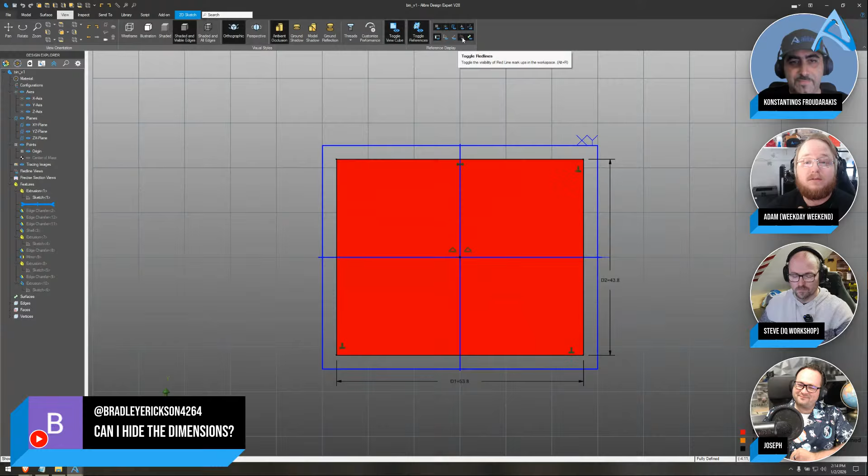So if you go in there, do you see it, Adam? I don't - where? Oh yeah, references here, but it's probably right in front of me. Go into the Sketch tab - the blue 2D sketch. Over to the right, all the way to the right. Oh okay, bottom left button. Hey, there we go - toggle sketch dimensions. See, Costas, he's got it again.

You can't leave dude, we're gonna tie you to your chair, you're not allowed to go anywhere. I kind of have to actually, but I can definitely tell you guys that if I could, I'd be here all day. Look guys, most of you know that I'm into racing, right? One of the most famous races in the world is the Le Mans 24 Hours. So how about we do a 24-hour Q&A stream? We'll do some streamer driver changes. Well, then, we'll go for 24 hours - the four of us can do it. We'll do 3-hour stints and we'll be fine.

I like it. All right, co-driver. Yeah.

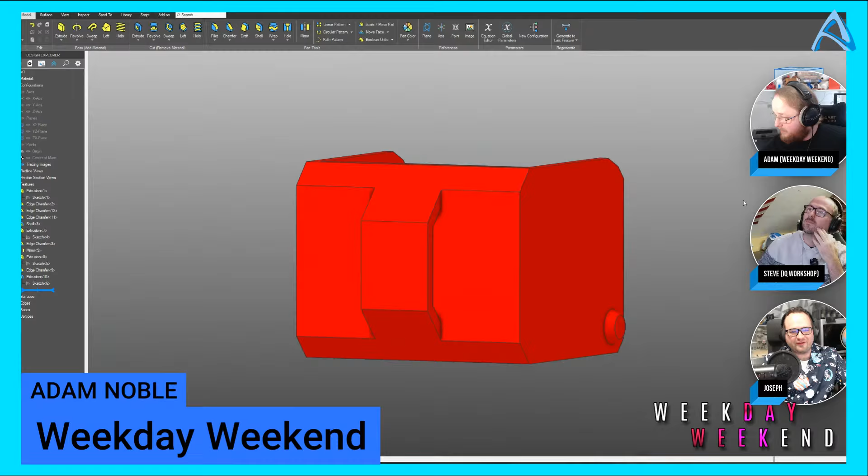If you don't mind, I'll take the screen from you just for a quick sec, Adam. Another thing that really seems to affect fillets is if we go to Inspect, Check Part, choose an accuracy, and apply a check, we can see if anything has failed. We want all zeros or dashes in this column. If something isn't, sometimes that can affect the integrity of fillets in unexpected ways. If we have any errors in our models, it can point out bodies, faces, edges, or vertices we can go back and take a look at.

And that making those not fail anymore can often increase the integrity of fillets. I'll bring it back to your screen, Adam, if you had anything to share, but just that can also affect fillets. I guess another good thing to mention would be the equation editor. It might be a good way to make sure your fillets kind of stay how you want them to parametrically.

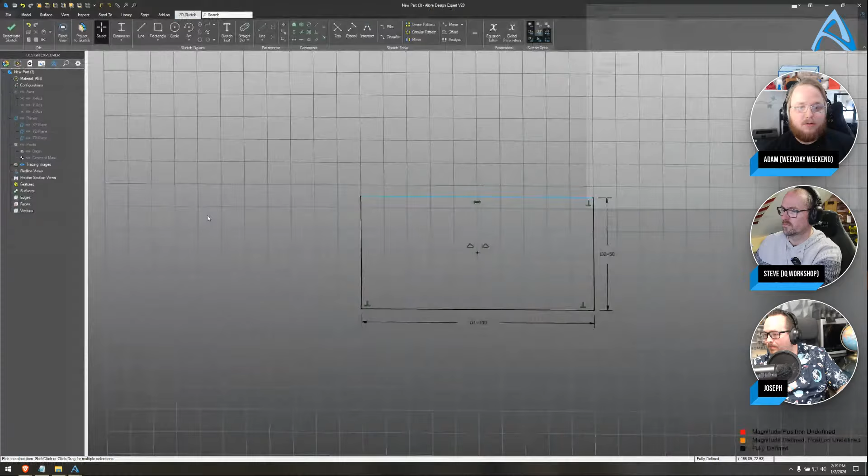So if you guys don't have the equations shown, D1, D2 for your dimensions and stuff like that, I would turn those on. I believe it's in properties, system options... I thought for sure it was in there. It might be in properties or system options. I always forget where it's at because I only turn it on once and forget about it. Well, you know what? No, I think you were right, actually. I think it's in properties.

Yeah, it's in file properties, units, dimension, show equations. Or, right, no, not units, just dimension. Just in dimension. Okay, yeah, show equations right here. So you can use like D1 here, for example.

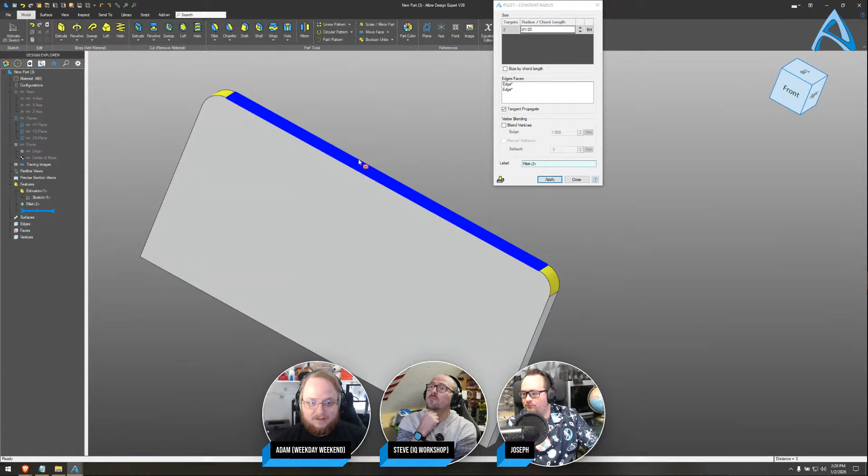If I just extrude this, say 5, and try to add a fillet here, of course you can add your actual dimension, whatever that might be for your fillet, but maybe I want to do D1 over 5 -- though that's a bad example since it should be the same amount. You could do it like that with equations, and that way you get it parametrically, making sure they're not going to break. If you choose a value that actually works, you can use the equation editor to your advantage and do something like that to have more control over your fillets if you make your dimension a little larger.

So if I go back in -- I should have kept that fillet. If I do like D1 over 10, and then go in and modify my sketch to be 125, it'll still do my fillets accordingly. That might be another way to go about it.

Just if I click share, is it going to share my screen? I assume. Yeah, you can share your screen. So I'll give everybody a quick preview since it is relevant to this question of V29. Let me try to do this.

Okay, can you guys see my screen? Not quite yet. Let me bring it in here, Max. And you're live. Cool.

Okay, so since it's relevant to the fillet question, I'll cover just a few quick things at once. You see, the dialogues look a little bit different. They'll tend to be dockable over on this left-hand side, and most of the stuff will tend to occur over in this area. Anyway, if you've used Alibre for any amount of time, undoubtedly, if you're monkeying around with spinner increments on constraints or spinner increments on fillets or anything where things start to fail and you get that big modal, in other words, it gets in your way.

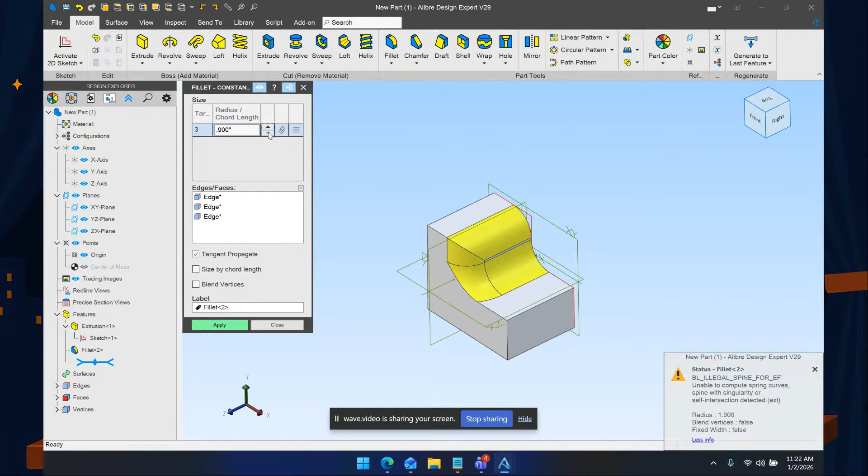Anyway, the point being that this is just a quick preview of not only the new notification system in V29, but a high level of what some of the dialogues look like. You'll see a few of the fundamental approaches. The previous extrude boss dialog, for example, was really dense and half the stuff's grayed out at all times. And it doesn't make a ton of sense. So we've taken a different approach of being able to only show you what's available and let you enable things to show them in the UI, but otherwise they stay hidden.

And that approach has been carried out through all kinds of stuff. So the color properties dialog, it's a little bit easier to select your colors and you can edit the colors. And those will actually stay between sessions and things like that. So, these are just silly examples, but the point being, from the extrude dialog to the way that we're showing notifications all the way to part color, throughout the entire product, we've tried to make tons of little micro improvements to make that process easier and to make the UI smaller and more digestible without showing you tons of things that you can't use or are not applicable to where you are in the workflow at any given time. So anyway, hope that was a fun little preview.

Beautiful stuff. I like that. And it's for all you folks who lasted this long and stuck with us.